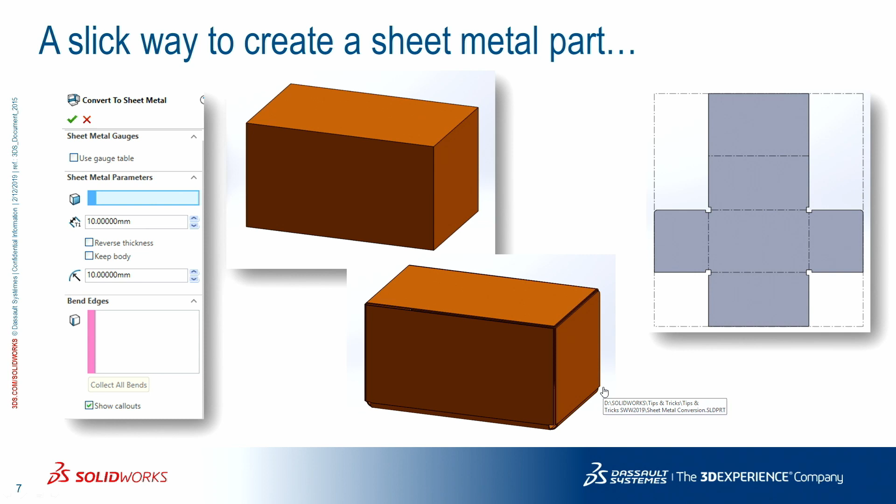Okay. All right, so I'm going to show you a slick way to create a sheet metal part. Now, most of our tips and tricks, I'm sure a lot of you probably know some of them. Some of you may not. And we hope you get at least one or two out of them. When you walk out of here with that, we'll be happy. Pull that up. There we go. So I'm going to roll this back. They're all pre-canned demos, but we're going to live in SOLIDWORKS. So I'm starting with an extruded block.

Pretty simple. Up in the sheet metal tool, you have convert to sheet metal, which is right there because I already have it in a sheet metal mode. So convert to sheet metal brings you to this. So you're going to grab a bend parameter, which is usually just the face on the bottom or the side. That all depends on you. Doesn't matter where you start it from. Right there. So I'm grabbing that bottom face.

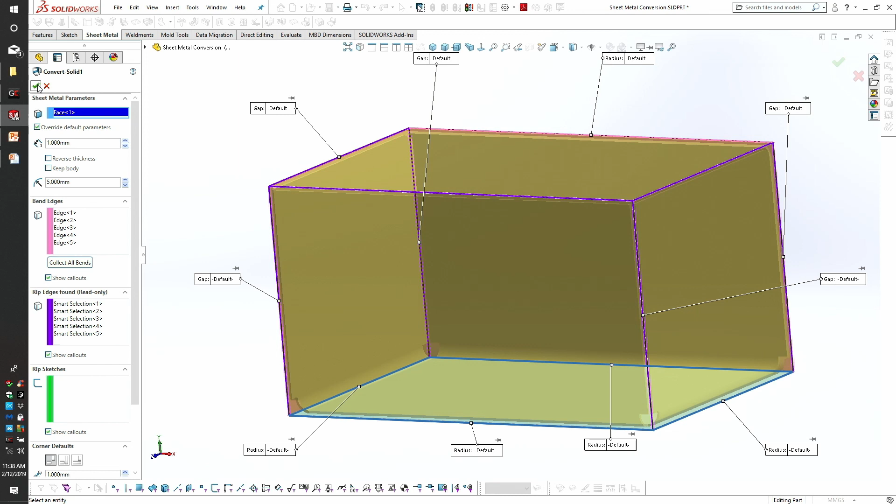The bend edges, all you do is click Collect All Bends, and it'll find all your bend edges for you because I've already had the process, already have the bend edges in there. But it's basically the other four corners of the opposite side of the face. So I pick that corner there, that edge there, and that edge back there. The rip edges, it'll automatically populate that. Pretty straightforward. Hit the green check mark, and you have a convert solid. Now you can do a flat pattern with that as well.

Flatten. And there's your flat pattern. Now it's all from a solid. One of the other things you could do too is if I do a split line on the top and I click that bottom edge, it'll actually create a window in that sheet metal. So you can get really creative with convert to sheet metal if you really want to get there.

But for those of you that may not want to dive deep into the sheet metal tool, start off with an extruded block. Pick a face, convert edges, click a couple edges, and you're done. It's really simple. Don't try to make your work harder, work smarter. Pretty simple stuff. You? Thank you, Ed.

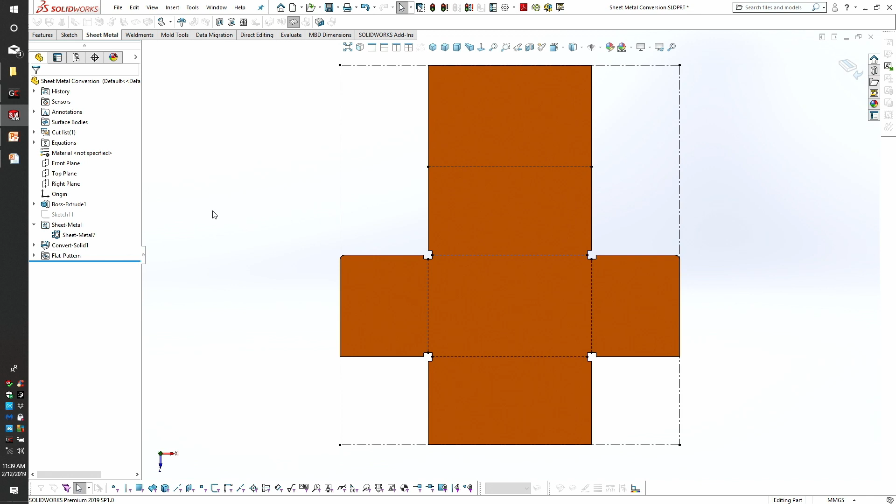Yeah. My first one here is really not a tip or trick. This is one of the new enhancements for 2019. And from teaching for 25 years and teaching the SOLIDWORKS software for more than 20 years, one thing I see that's very common, whether it be a student or a person that has many years of experience out in industry, once you learn how to use the software, when you're creating parts, assemblies, and drawing files, typically for many years you don't vary from that path.

You create your parts the same way over and over and over. And the same with assemblies and drawings. And in fact, I tell my students, they always want extra credit work. I tell them the best thing you can do is get up and help other students. Just see how other people approach models. That is one of the great ways to better learn the software.

Well, we have new releases every year. New features, new enhancements come out, and I think a lot of times we see them, but we never use them, we overlook them, especially the smaller ones. And here's one of the smaller enhancements, but it's very useful. How many times do you have a fully defined sketch, then you get in there and start trimming, and now it's underdefined? Very common problem in a classroom setting, and I even see that's kind of an issue out in industry too.

Because my entire program is mechanical design, and we do mechanical parts, I require all of my student models to be fully defined. So one thing I do is I expand the tree, and I make sure every sketch is fully defined. So I'm going to go ahead and click on this. And before 2019, let me go ahead and edit the sketch. I'm going to go to my trim tools. I'm going to use the power trim. And you can see before I start to do the power trim, it's fully defined in the bottom right-hand corner.

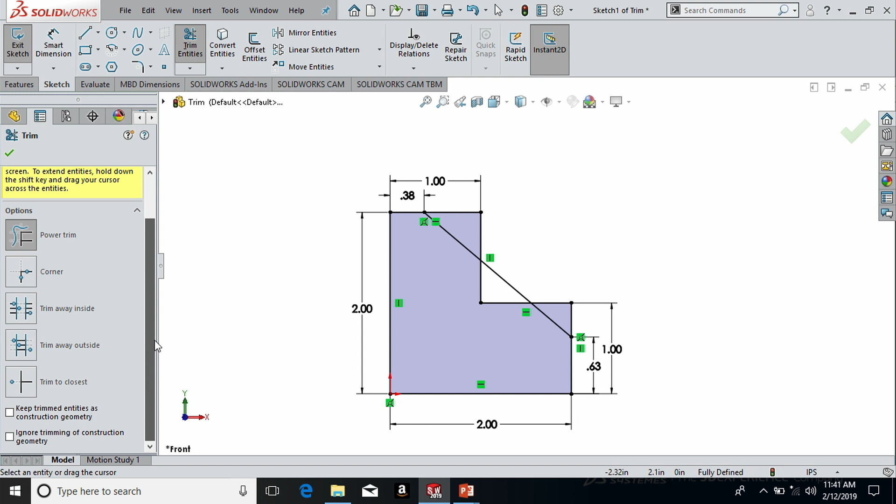However, once I use that power trim and I begin to trim, does it take too long before it's underdefined? And a lot of times we're just so busy, we overlook that. So in 2019, let me undo that. Under the trim entities, we have two new options. How many people have seen these two options? See, just a few people. So this is really cool.

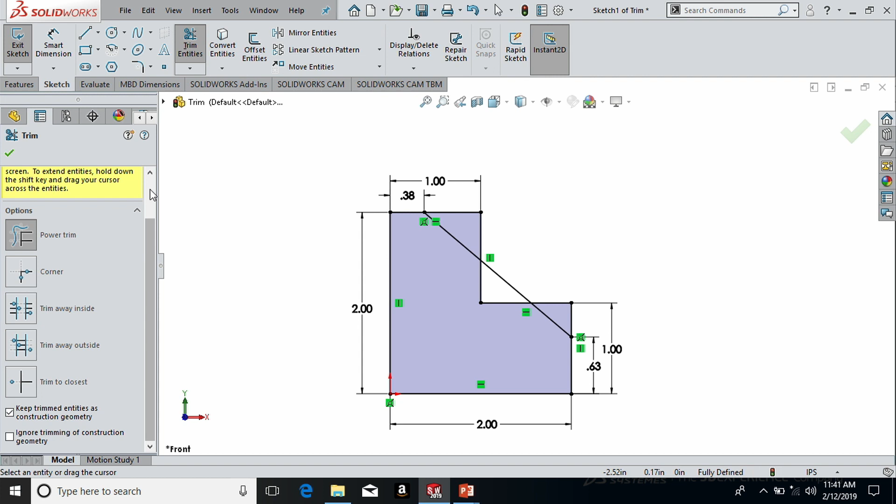These are both check boxes, square check boxes, not round radio buttons where you have to make a choice. So you can have one checked, both unchecked. But the first one is keep trimmed entities as construction geometry. So I'm going to put a check mark here. Excuse me. I'm going to go to power trim and check this out: when I take my spline, it switches it over to construction geometry, and it keeps my sketch fully defined.

Really slick. It is a huge improvement for us in education, because students are learning this software, they get their sketches fully defined, they trim, they turn their assignment in and get marked down because it's not fully defined, and they're frustrated. They don't know why. They say it was fully defined, what happened?

The second option is ignore trimming of construction geometry. So in this one, as you're taking your spline through construction geometry, it will not trim it away. It will keep it. So two smaller enhancements, but really cool. I think it's going to make a difference on the sketches we do out there. So if you haven't seen that yet, it's part of 2019, just one of those smaller enhancements, but I think it's pretty neat.

And at any time, throw your hand up, throw out a question. This is interactive. Yes? I believe so. Yes. I would have to check on that. I believe so, yes.

So in this example, I used this yellow configurated part, and I'm going to show you the bounding box. And there's some value to the bounding box. You can use this for any part feature, doesn't matter what size or shape it is. The bounding box will give you parameters X, Y, and Z. That actually might be helpful downstream in a manufacturing environment. Maybe on a drawing you want to display the bounding elements for size purposes for a manufacturer.

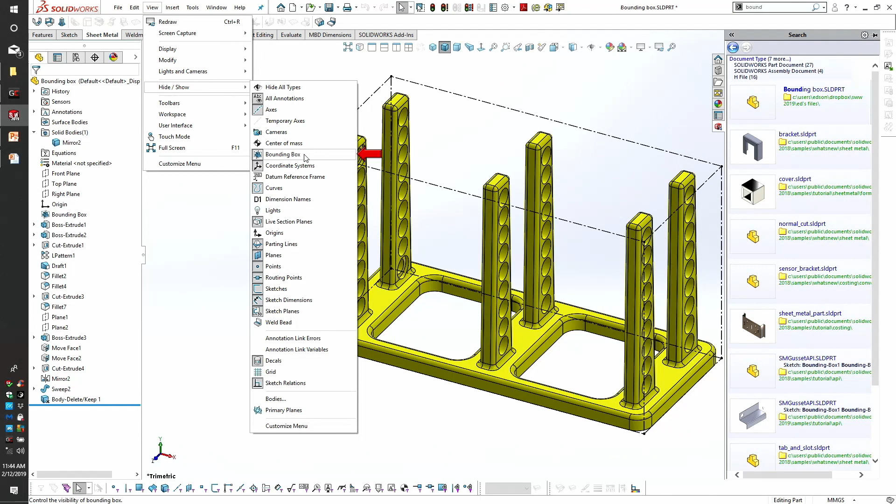This is interactive. Roll up your sleeves. Dean rolled up his, but he's got tattoos down to his wrists. I've only got it down to my elbows. So not yet. Getting there. And there you go.

So here it is up here. Bounding box. I'm going to edit this feature. Best fit, custom plane, so you can decide where that bounding box should start. I'm going to go best fit. That seems to work the best for me. It'll actually give you that geometry automatically. Now, here's the beautiful part. Go up to the Properties tool, Configuration Specific. There's all the values of that property, of the bounding box.

I can use that on a drawing. I can call out those properties in a drawing or in an assembly. And that actually might be good for somebody starting, if it's a piece of sheet metal, or maybe a piece of plastic, whatever the case may be. Pretty simple, straightforward. You guys like that one?

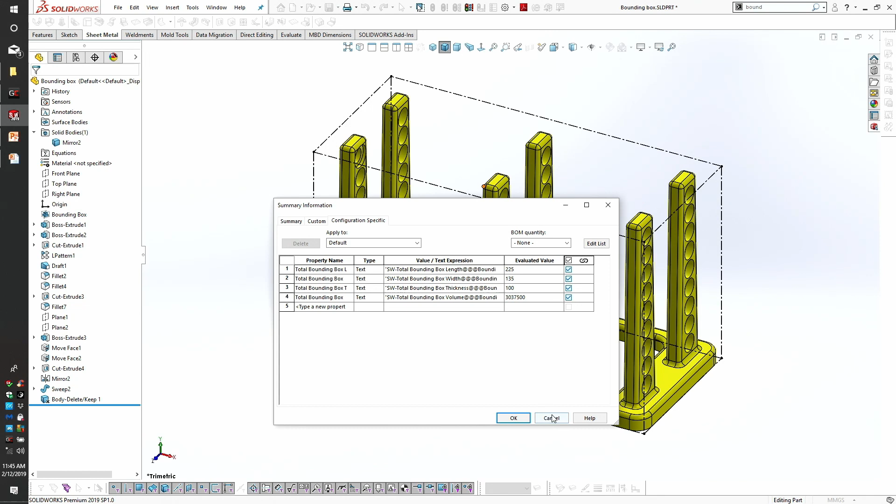Give us some feedback. We're up here listening. Hit the now or close this. Yep. Bounding. Oh, that's fine. See, this is what I love about these tips and tricks. I just learned a tip and trick. That's a pretty cool one. That is cool. I didn't know you could do that with the S key. Thank you, Steve. All right.

So if you have a uniquely shaped part, will it best adjust the bounding box to get the minimum? Yeah, mass size. It'll go right to the edges, X, Y, and Z. Yeah, so that's perfect. That's exactly what that's for. I learned this tool from a friend of mine who does a lot of aerospace parts. The manufacturer wants to know what that size envelope is going to end up being. So this way here, they know how much material they're going to use.

Say that again, Mike? Exactly, yep, from a certain plane or a certain surface. Say that again? Yeah, anything that's geometry in the SOLIDWORKS desktop, it'll give you a bounding box. 2016, I think, is when it came out. Anybody know? Any VARs in here that would know that? I see John Hall there in the back. John, do you know? Take a guess. Okay, 16 is correct.

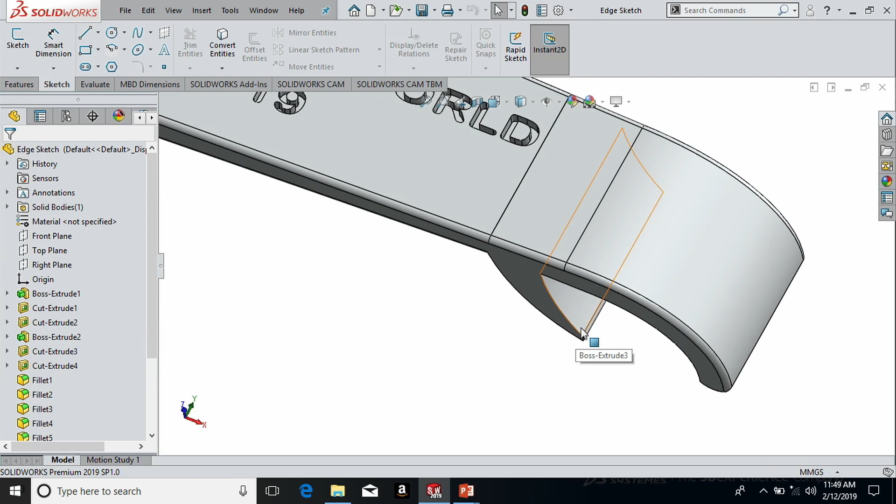Normally when you want to place a new sketch plane, let's say at the very end of this piece of geometry, at the very end of this entity, and you want it to go through this endpoint here, we would go to Features, Reference Geometry, and we would select Plane, and then go through the necessary steps to add that. There's a cool little shortcut.

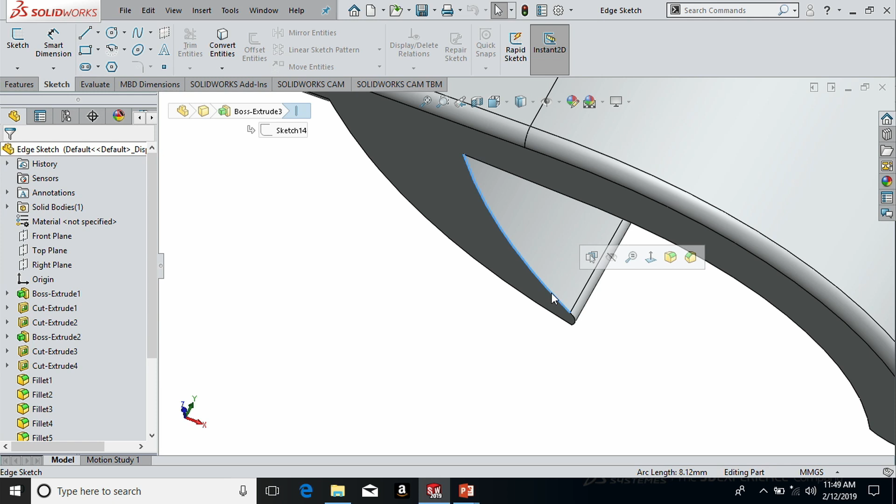All you need to do is click on this entity near the point where we want the plane to be normal to that entity. So I'm going to click right here, just one left mouse click. I'm going to go up and click on Sketch, and it creates a plane normal to that line right at that point. So again, really slick.

You don't have to go through all of the necessary mouse clicks to insert a new sketch plane normal to an existing line. I'll do it one more time. I click on this line here. I click on Sketch, and it creates a new sketch plane at that point, normal to that line segment. Yes. Plane 1 and plane 2.

Any questions? Preloading that reference geometry. Yes, just saves you a couple mouse clicks. So really handy. And this works on any edge type from linear to prismatic to organic shapes and even lofted shapes. So really cool. Saves a lot of time. Yes, just a single click and then you click on the sketch icon and it creates a plane.

Half the time you do that and you create a plane, you don't know how that plane got there. You just did what Dean showed you. Yes, exactly. Seriously. How did that plane get there? Well, I didn't click nothing. Well, you did. You just don't know you did it.

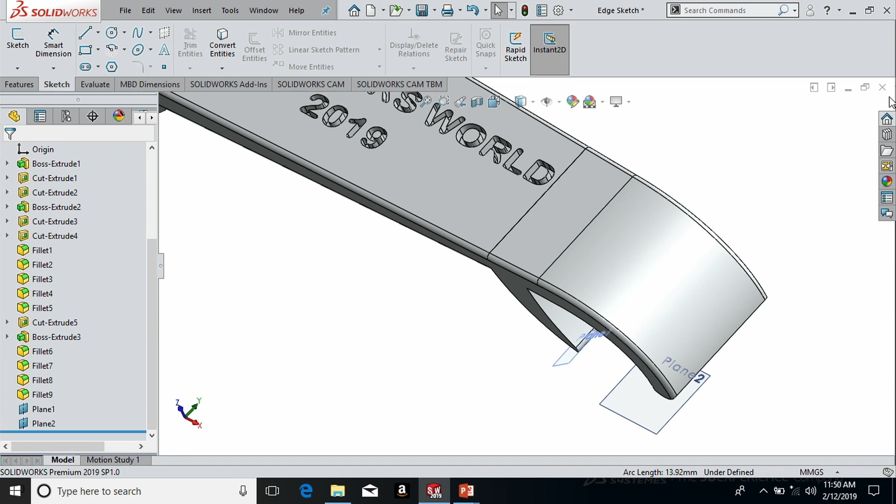Yes, so exactly. The first one I selected near that end point. So if I selected more at this end, then it would place the plane over here at this end point. So it does make a difference where you select along that segment. This one's pretty straightforward and easy. Sweep and merge faces. Let me open up the file.

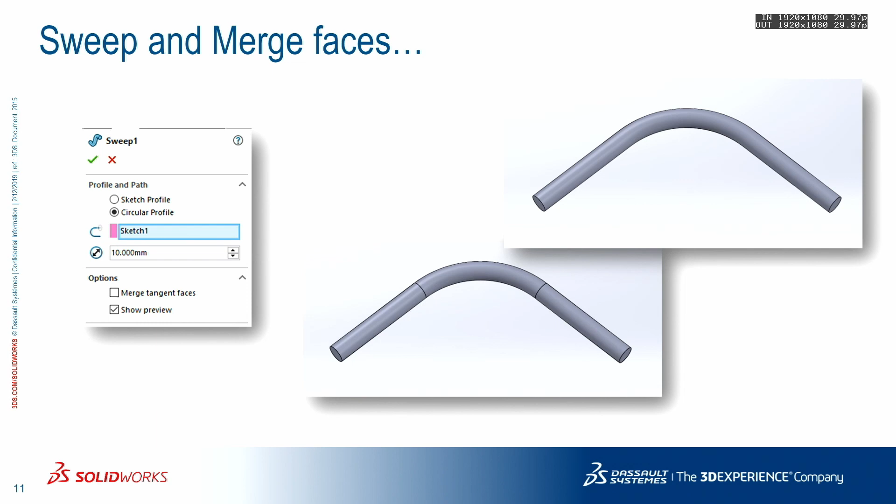So we've all created a sweep, correct? But you get those segmented lines off from all the curves or whatever the case may be. You ever want to just turn it into a smooth part like it was a spline? Pretty simple. Create your normal sweep. You have this nice little feature right here called Merge Tangent Faces. Click on Merge Tangent Faces. There you go. That one's about as easy as it gets.

It's slick. There's a slight caveat with it. If you're going to use the part file in a drawing, you've now removed those edges, any of those sketch edges you need. So if you need to dimension to that, you can't. You're going to have to do a little setup in the sketch to get those points to show up in the drawing side. That's all. Any questions? Yes.

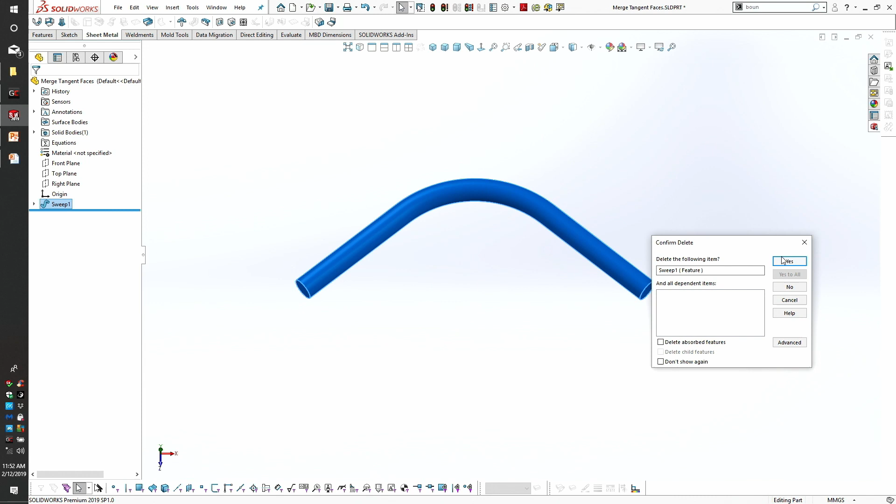No, because the surface would be continual, wouldn't it? Not necessarily. You want to try it real quick? Let's see what we get. Let me delete this. I got that. Surface. Circular profile. Let's change it to something small. Click that.

So options, merge tangent faces. Let's see. Ready? There you go. Cool. Yeah, it's the same underlying code. True. Very true. So surfaces and solids. Yeah, to the arc, you won't be able to because there's no edge reference there anymore. So you have to create some geometry to pull that into the drawing.

But sometimes when you're looking at models, I like that nice clean flow. I don't like all those edges. Just me, but it's a nice little tip people don't know. Yes, sir. I have no idea. I think it's been there forever. So at least 16, right?

It's like anything else. You're in SOLIDWORKS, right? Click a button. What's the worst that can happen? You just dump the file and reopen it, right? So click around, pick buttons, see what happens. That's how I came across this. Oh, what's this? Click. Oh, that's sweet. Nice. Any other questions?

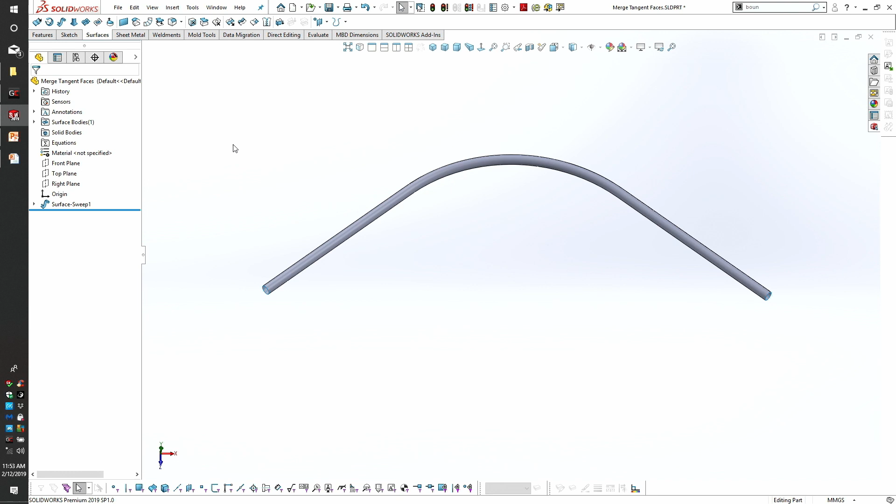I've been using SOLIDWORKS for more than 20 years now. And every once in a while I'll be looking at a command I've used hundreds of times over and I see a new option. When did they put that in there? It's been in there for 3, 4, 5 years. You get so used to just doing the modeling the same way.

Hold on, Dean. Okay. So real quick, does everyone know that I didn't use a sketch, a circle, a square to produce that profile? It's built into the sweep tool now. Who didn't know that? Few people. So if you don't have a diameter, I think you can only do it with a diameter. Yes. But if you don't want to create that geometry, you don't have to. You just type it in right there. That's really slick. I like that a lot.

Not one that you can pick on. No, it's probably Booleans buried in there. You can double click on the model and it'll come up with a dimension, but there's no sketch. It's canned. It's one of those canned parts of the program.

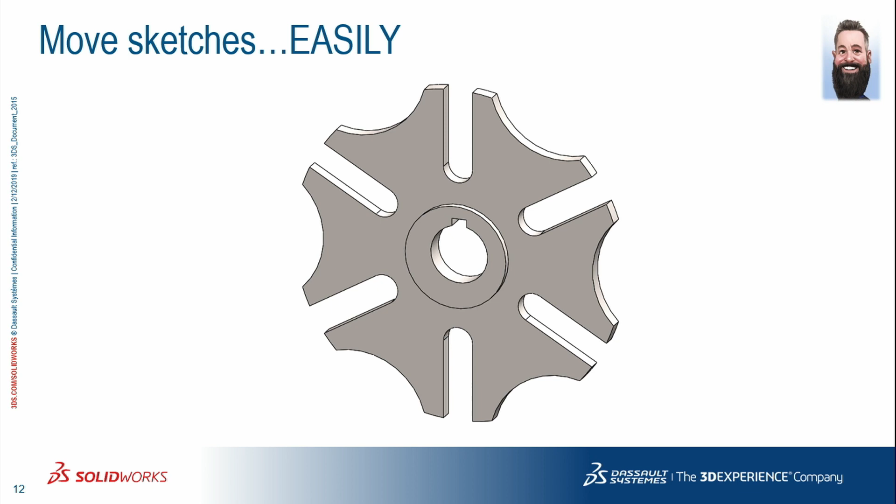So on this next one, I'm going to show you a real easy way to move a sketch. You can see I purposely took the sketch for that bore and that keyway and moved it off center, which is incorrect. A lot of times when we import, we do a copy paste from DraftSight or other 2D applications. That data comes in underdefined and doesn't come in the correct location, so we go to move it to the correct location, and it doesn't work as you would expect it to. So let me go ahead and open up the file and show you what I'm talking about.

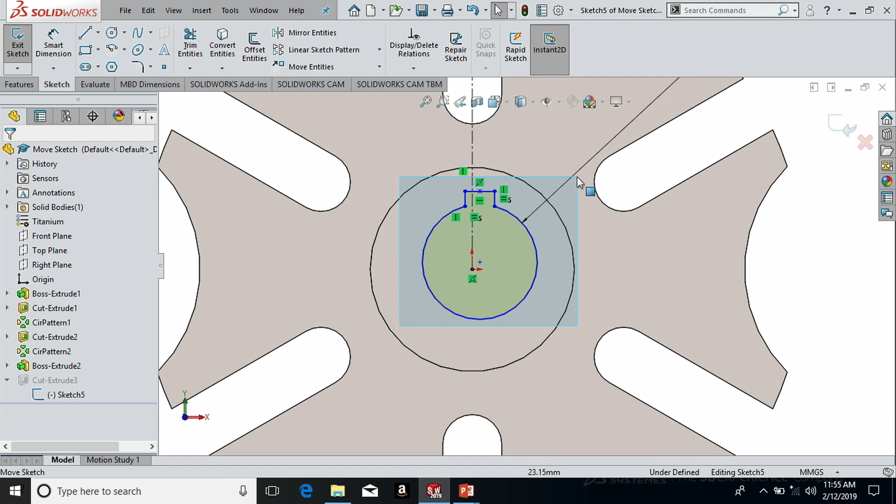So let's see here. First of all, I need to identify the sketch that falls under Cut Extrude 3. So I'm going to edit the sketch here. And most people believe to move this sketch, you would simply put a window box around it, correct? You'd hold the left mouse button down on the center point and drag it over to the origin. But look what happens. A lot of people believe it should move it, and it does not. So we do have a Move Entities tool up here, but if you get into discussion forums, there's a lot of frustration with this because a lot of times it does not move it to your intended point. So I'm going to show you a way to move that sketch real easy.

I'm going to go ahead and window select it one more time. This time, I'm going to hold down the Control key on the keyboard. I'm going to hold down the left mouse button on the center point, and I'm going to move it off to the right for a second. I don't know if you can see my screen up here, but notice there's a plus sign next to the cursor, correct? That means it's going to copy it, not move it. And if I go over to the origin and I release the left mouse button, it makes a copy of it. That is not what I wanted. So I'm going to go ahead and click undo. As you can see, the geometry is still selected, so no need to reselect it.

Here's the trick. I'm going to hold down the Control key, hold down the left mouse button on the center point. The trick is you want to release the Control key first. When you release the Control key first, it moves it instead of copies it. Really nice. I want to hear an ah.

We rehearsed this before the weekend because he lives in Michigan. I live in Mass, so I tried to get myself to Michigan, it just didn't work out. He showed me that and I went, damn, that's slick.

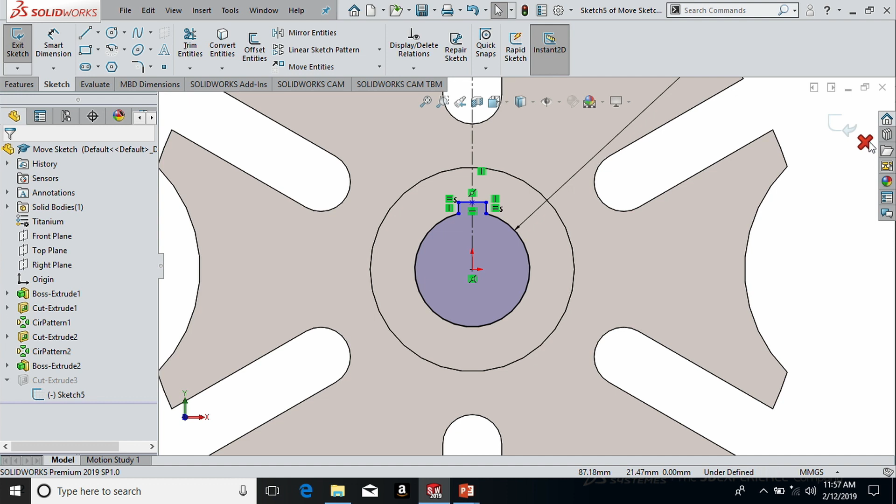So Control key, you have to release that Control key first. Then it'd be a move command. Any questions? I think it's just a caveat, I just kind of stumbled across it at one point. Windows functionality. Yeah, like most things, John.

Yeah. What's that, Dan? Yeah. And you wonder what happened. After one of these, right, Dan?

We could have. Yeah, that was another option. Well, you could have dimensioned it too, right? Yes. And then you can drag it. Don't point it to anywhere, but then drag it over the origin. Could do that as well.

Yeah, and quite honestly, in my classroom setting, my best practices for my students are always: number one, you always allow those automatic relations to be added automatically. Number two, if need be, add or remove existing relations. And number three, always smart dimension last. You want to define it with the relations first before you smart dimension.

Yes. So if you're in DraftSight, you've got a sketch over here, you want to bring it to the origin, you want to go pull it, you want to bring it across. So that's... Yes. Yes, exactly. Anyone else?

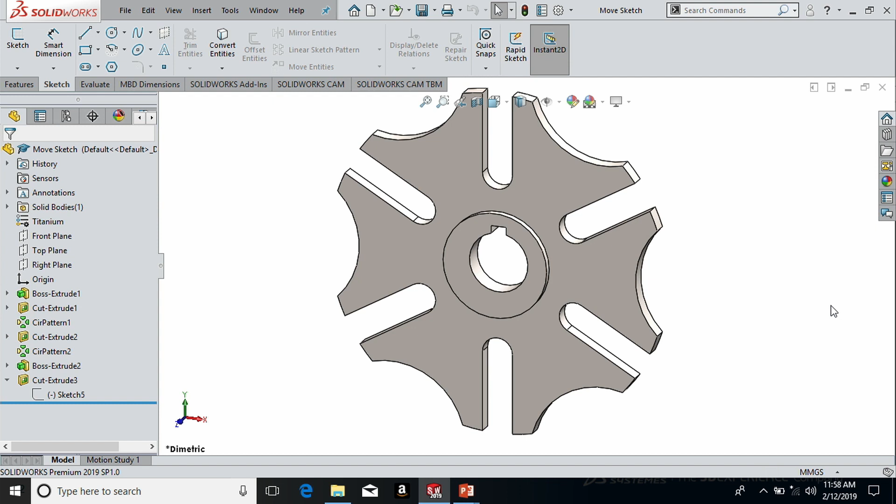Here we go. I'm going to show you how to do this spiral on a dome. Create an extrude, of course. Who's used the intersection curve command? A few people. Wow. All right, maybe I don't need to show anybody. All right, let me open up the part file.

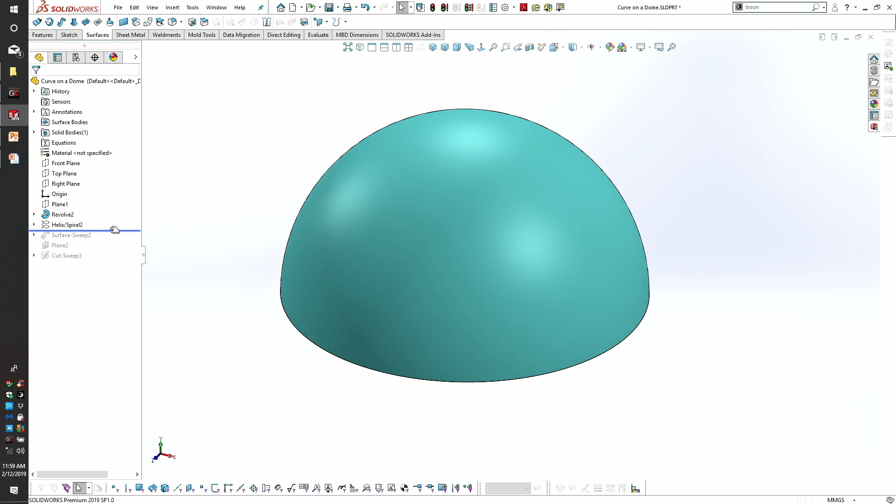So a challenge, colleagues, how do I create this? So both of us were going back and forth trying to figure it out. And between both of us, we went, intersection curve. So I'll go through the motions of what I created. Pretty simple, create a revolve, right? Create a helix. Let me turn these on so you can see. So I just create a sketch in the center. That helix is actually going to allow me to do a sweep, a surface sweep, all the way up.

Here's my surface, turn that on. So there's my surface. There's my geometry. So I have a surface, I have the dome, the surface of the solid, the dome. And I'm going to dive into the intersection tool just to see what that looks like, because it shows a little differently when you do it as opposed to afterwards. Intersection. Oh, you know what? It's probably not going to allow me to do that.

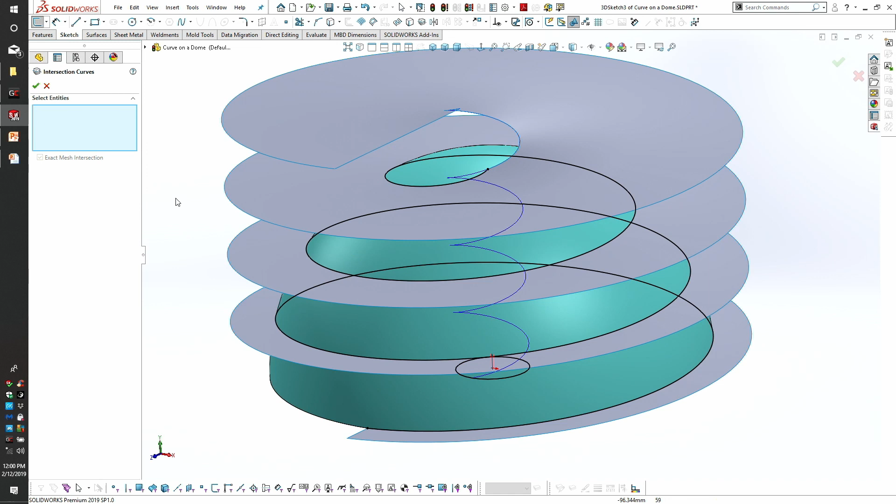Sketch. Intersection curve. So I'm going to click the surface. I'm going to click the dome. Green check. I'm going to hide this. I got to get out of this. Hide that. And I'll just hide this for sakes. Shut these off. So there's my geometry. That's what I want. Now, if I just needed that geometry to create a spiral, something extruded, I could do that. Obviously, I'm doing extruded cut.

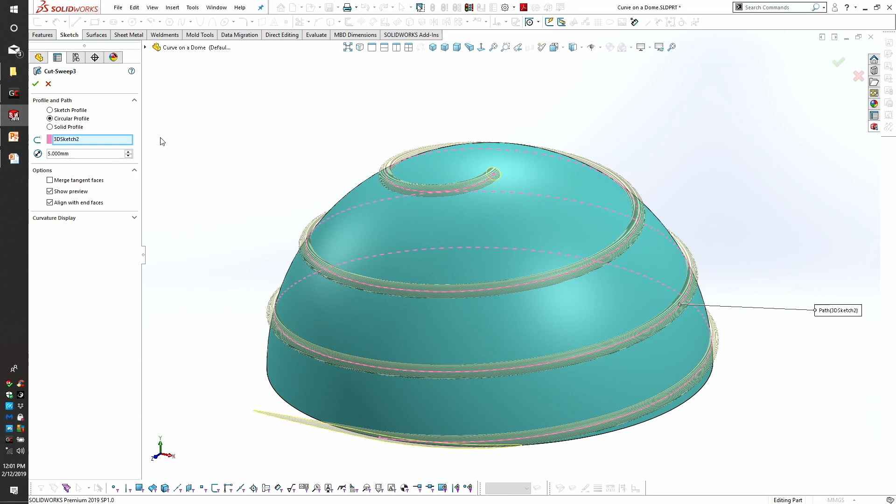And once again, a cut sweep. If I edit that, I've got solid profile, circular profile, sketch profile. I just dial in 5 millimeters, click the path from the intersection curve, and I get that nice extruded cut sweep. Pretty slick. Now, some of these examples are obtuse. We understand that. Well, mine are probably more obtuse, but they're obtuse on purpose.

Most of the tips and tricks that I get are because someone showed me something that I went, you know what, I could use that here, or I could have used that here. So I'm basically just showing you stuff that hopefully will plug in your brain. You go, I remember seeing a tips and trick. They use the intersection curve. You know what, I'm going to try that. That's where a lot of my tips and tricks come from. Yes, sir.

You can, but it doesn't create the nice sweep of a path. It actually makes it kind of a weirder path. When my colleague and I were doing it, I was actually trying to do the wrap feature, and it just didn't create, and there's a limitation on that wrap. You can't have a sketch overextending the geometry. It won't actually do the wrap. So, yeah, there's some limitations there. Yep.

Hijack it, Dan. Please, hijack. If you wanted to boost your rebuild time and reduce the number of features, you could, instead of building a helix, just have a straight sketch, and your surface would be a straight line. Yep. And you just do the twist along path. Twist along path, yep, twist along path works too. There's still some computation with that as well, but yeah, the helix will definitely take a lot more computational power. Anyone else?

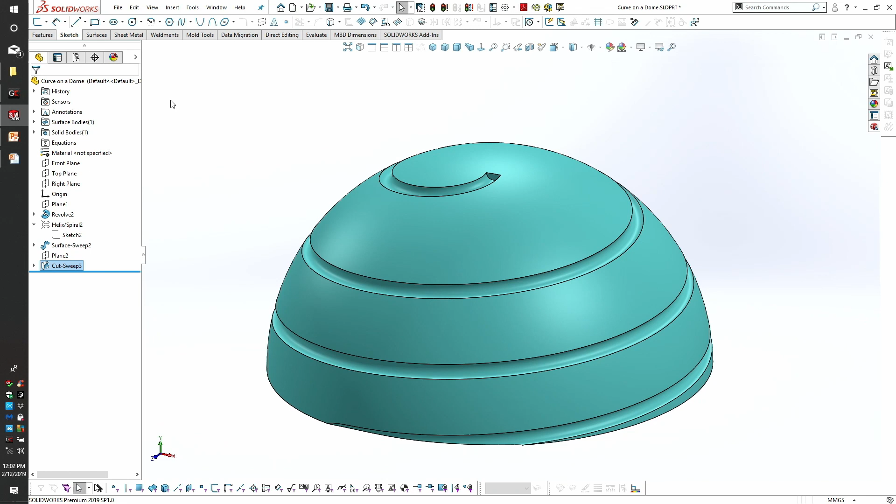So this next one here is really not a tip or a trick. Maybe the second part of it is, but not the first part. It's just, once again, people, once they learn how to use the software, they typically stick with that method because it's tried and tested, and they don't vary much from that.

And we have so many, just really quick side note here. Teaching at a community college, you realize that a lot of the students coming in your class, my classes range from 16 years old up to 76 years old. But you have so many younger students in your class, they don't have mentors. And a lot of our schools don't have CAD, machine tools, auto service.

So if you really want to expand your CAD skills, go out and find your nephew or niece or a neighbor that wants to learn the software and teach them the software. And then once you show them a little bit, send them off, have them come back, and you'll be amazed at how people take different approaches at modeling. And that will definitely help you expand your modeling skills too. Just seeing how different people look at models.

Well, this one here, how many people use dynamic mirror? Okay, about maybe a third of you, a quarter of you. We have so many parts that are symmetrical, and we're not using dynamic mirror. So for example, if we want to make this structural steel item here, what we would typically do is start the center line. I already have the center line existing. I'm going to edit the sketch.

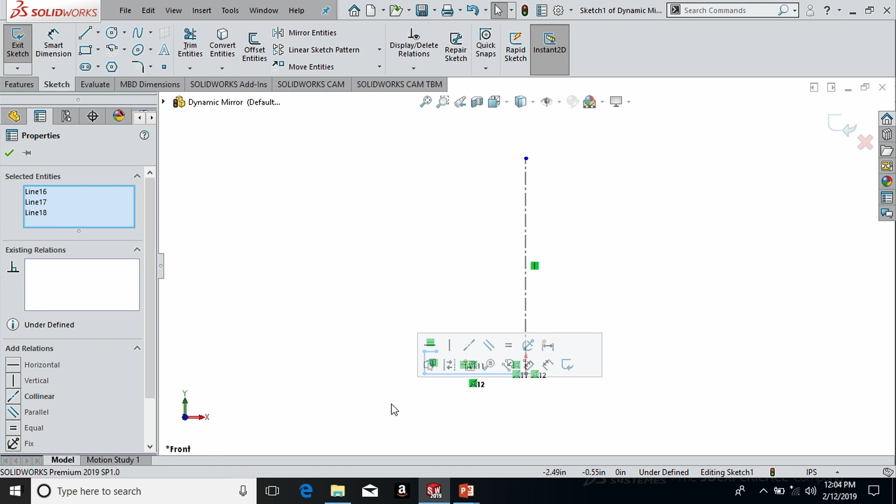And we would simply go out there and draw the geometry on one side of that center line. And after we had that geometry drawn, then we'd use the mirror entities to mirror it to the opposite side. That's how most people mirror geometry. But we have something called dynamic mirror, and this is really cool. If I go to Tools, Sketch Tools, Dynamic Mirror, it prompts me for a center line.

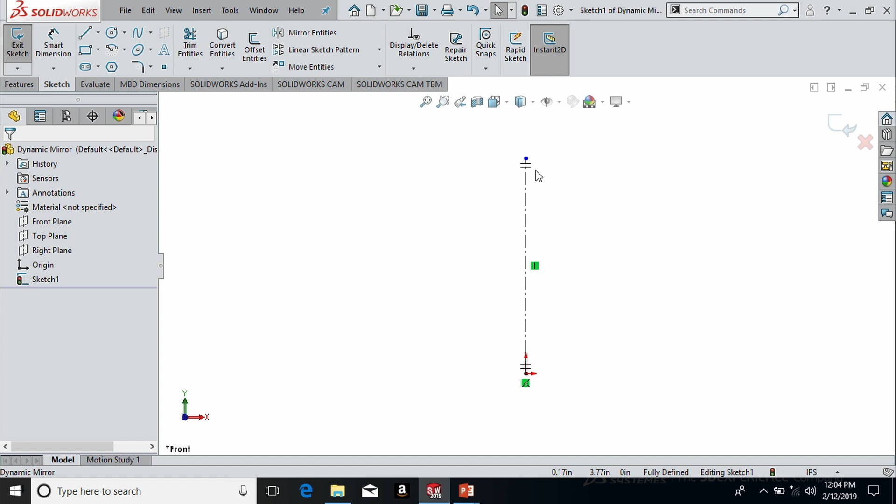So I'm going to select this center line, and as soon as I do that, I'm going to see a symmetry symbol on both ends of that center line. And here's the dynamic part of it: it will build it on the opposite side as you're building the sketch on the left side of that center line. Really, really handy. Now, one thing you need to be aware of, if you close out of the sketch and you want to go back into the sketch and make changes to it, it does not place you back in that dynamic mirror command. You have to go back through Tools, Sketch Tools, and Dynamic Mirror and start it back up.

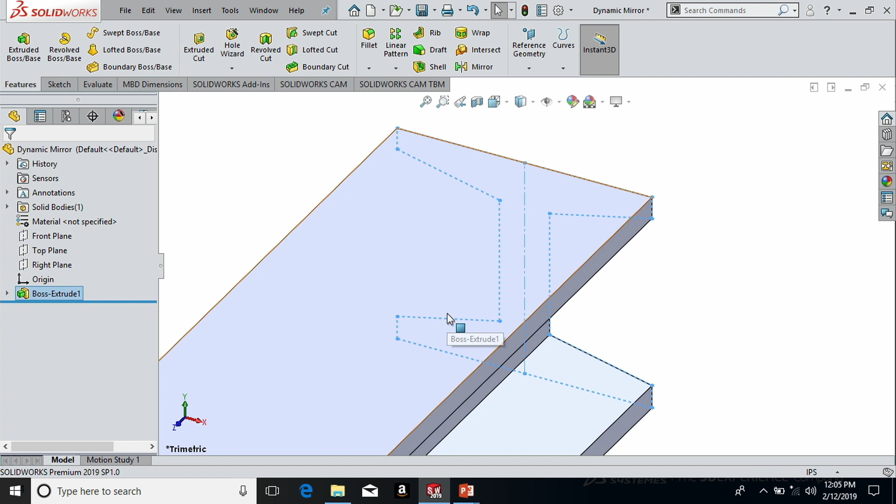And the next tip here, this would be probably for the newer users. Let me go ahead and just extrude this really quick. When we are out there measuring entities or finding the angle between two lines or two faces, most people head straight to the Evaluate tab and click on Measure. You may not know this, but down in the bottom right-hand corner, if I click on a vertex, it'll give me the XYZ coordinates of that vertex point. Or if I click on a line segment, it'll give me the length of it.

Or if I hold down the Control key and select two lines, it gives you the angle. And the same is true for faces too. Anything more complex than that, as far as measurements, you would have to go through the measure tool. But for your simple measurements, this is really nice. It just eliminates a couple mouse clicks. You can go right there and select it, and it shows up down in the bottom right-hand corner.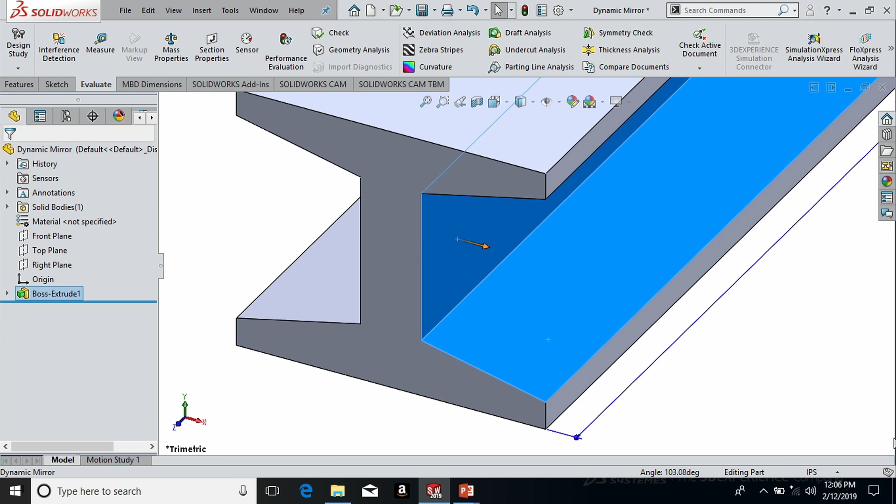Yes? Do you have to exit the sketch to get out of dynamic mirror mode? Escape key, right. Yeah, Escape key. Any other questions? Back there. Does it work on? What? Yes, it does, because you're only defining one section of it because it's doing that dynamic mirror on the other side. And you'll see it's adding the relations as it's building it. And for time's sake, I didn't do the last part of this and add the smart dimensions.

I don't believe so. It's one time. You're talking two at the same time on the same sketch? Yes. Oh. No, I think it's strictly for that type of geometry right there. Anybody else? The other thing you could do too, obviously, you could mirror that as well. But now you have to go to another window to do that. But that's SOLIDWORKS, right? You could do the same thing three different ways, right? So add that to your repertoire as one of those ways.

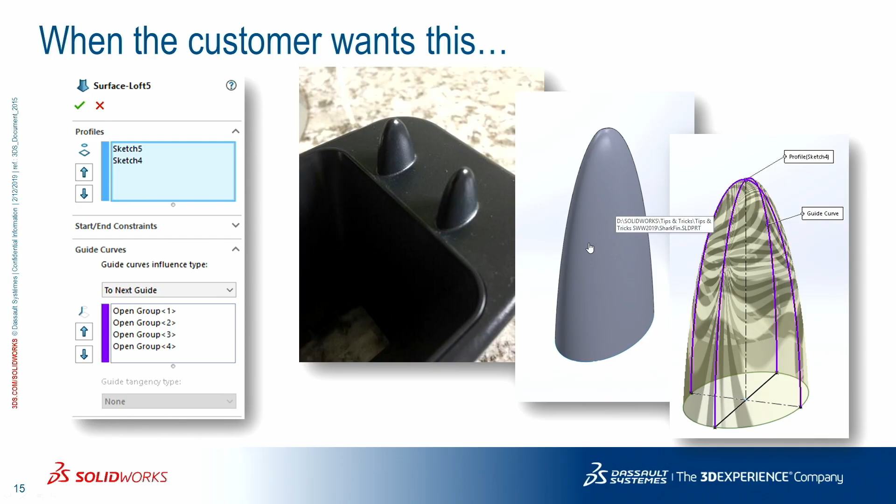So on this slide, I'm going to show you how to produce that geometry. So that's what the client wanted, and I have to reproduce that. I actually had to do a little search to figure out how to do that, but I'm going to show you how I did it. I'm actually going to delete this.

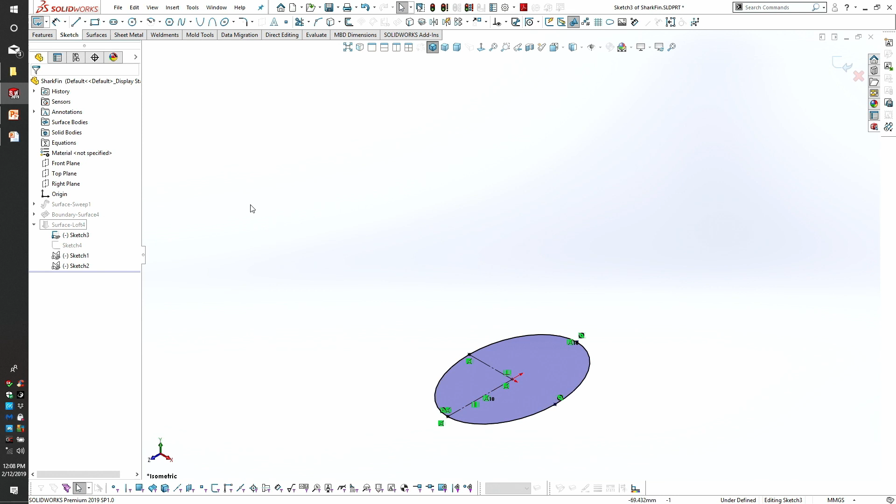I want to do that. Delete. I'm just doing a little cleanup to make this easier to represent. All right, here we go. Okay, so there's all the sketches that I created to make this. Delete this. So there's this sketch.

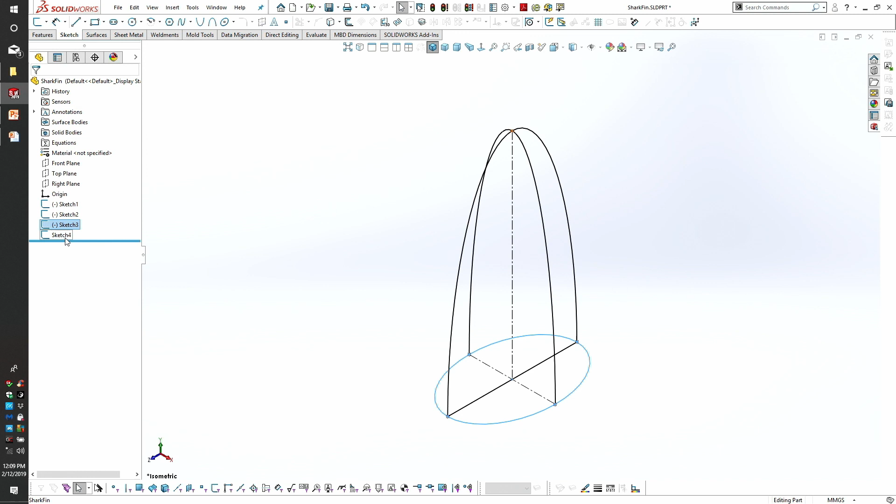That's actually 2 segmented ellipses or arcs, whatever you want to call them. Those are 2 different sketches, starting at the top, working their way down. Single sketch, 2 entities. That's a single sketch at the bottom, and that's a point. And it's right there. It's kind of hard to see.

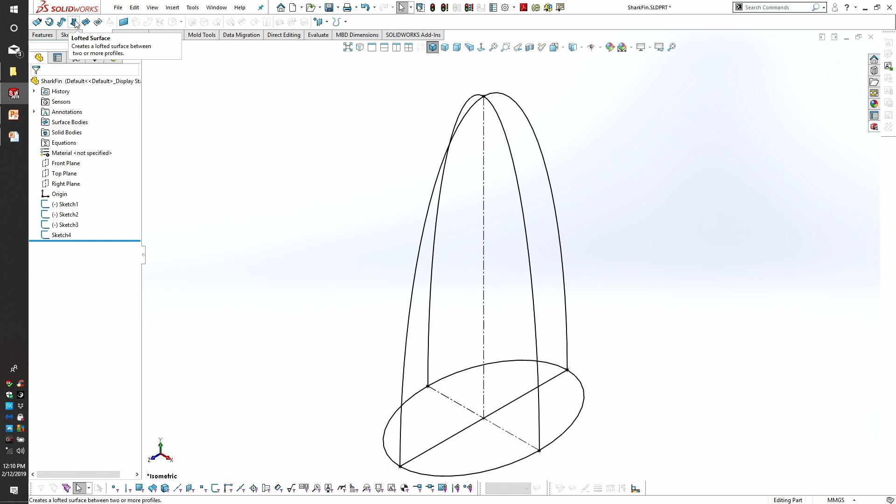So I'm going to go to my surface tool, because in solid, doing this in a solid loft, it performs a little differently. So if you're ever having a problem doing a solid loft, try a surface loft. First thing I'm going to do is I'm going to click the sketch 4, which is that point, and the bottom sketch, which is a complete ellipse at the bottom.

I'm going to click on the lofted surface tool. So I get this. So a point at the top, sketch at the bottom. It does that nice loft, okay? There's a little bit of a catch with this. That sketch 4, which is the point at the top, has to be below the sketch 3 in the profile order. If it's at the top,

it doesn't work. But in 2019, it works. In 2018, it doesn't work. This is why I didn't want to switch to 19. So in 2018, if you do this, the point has to be underneath. In 2019, I guess it doesn't matter. We'll continue. But I need those guide curves.

So the guide curves, the reason why they're segmented is I have to click one at a time. I have to go right around. If it's a single sketch arc, it doesn't work. It doesn't know to produce that loft. So I'm going to click on my selection manager tool. I'm going to pin it so it stays up.

Select group. I'm going to click that. Right mouse click, green check. You can kind of see it right there in the corner. There's that one. Right click. There's that one. There's that one. Let me just rotate around here. And there's that one. I don't do anything else.

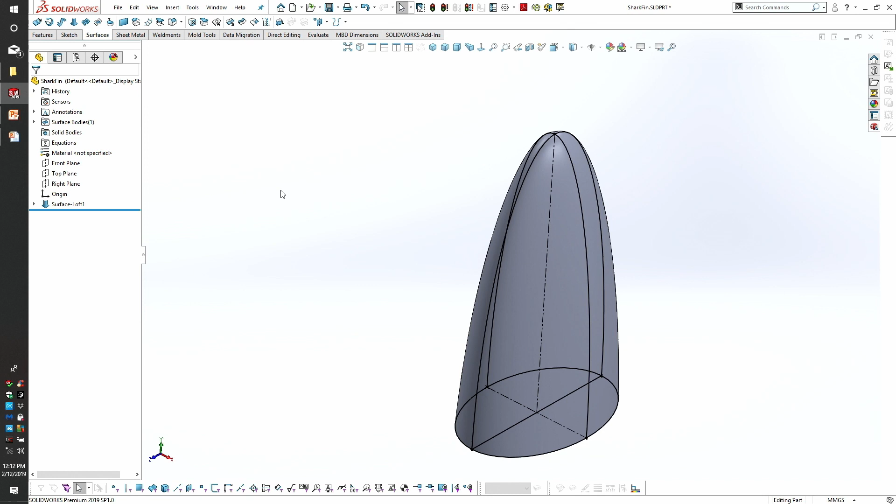Right there. Got it? Any other questions? Yes, sir. What I like to do too is just go straight from the ellipse. Yep. And then the point is set to normal to profile. Normal, yes. And you just get that shape, that bullnose. Yep, that bullnose shape. And unless you want to really control it. Yeah, I'm a little bit more decisive with the guide curves, but yeah, you could do that with normal as well. Yeah, that's a nice little tip.

Who does surface modeling here? Isn't surface modeling fun? No? Who said no? He raised his hand. No. That was funny. All right.

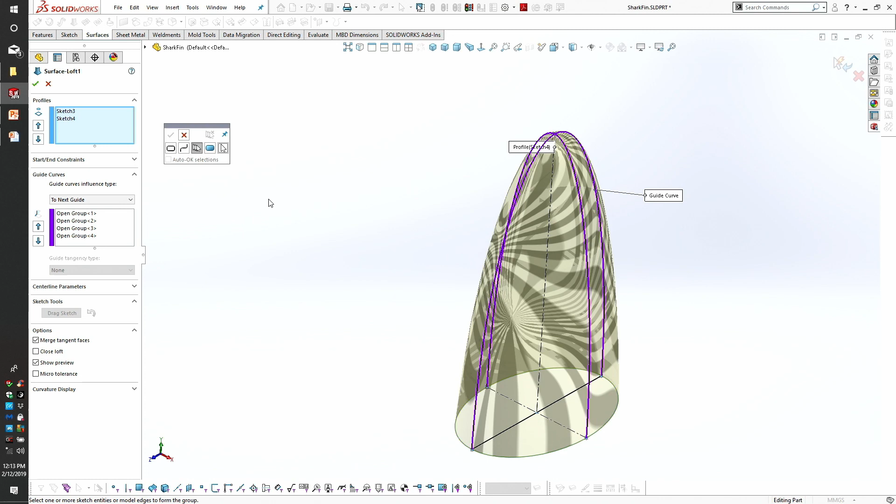I don't think a lot of people use decals. And when you do use decals, it's typically a custom decal. It's not one from the standard library. So the question is, okay, how do I create a custom decal? Well, first of all, the decals need to be saved in a P2D format. And again, most people, they need a decal, it's going to be custom.

And they've got to go out there in the forums, go through the help screen just to figure out how to create a custom decal and apply it. Well, most of the discussion forums and the SOLIDWORKS help screen will tell you to go to your add-ins and turn on PhotoView 360, which is your rendering. And it will step you right through the process to create a custom decal. Quite a few mouse clicks though. I'm going to show you a couple shortcuts to get the job done. So I'm going to go ahead and open up my beer bottle here.

And I'm going to select the appearance icon. Select on decals. I'm just going to pull over one of the stock decals onto the bottle. And as soon as I do that, my property manager opens for the decals. I can now click on Browse, and I can go find my JPEG image or my PNG image. So I'm going to go find GP's photo.

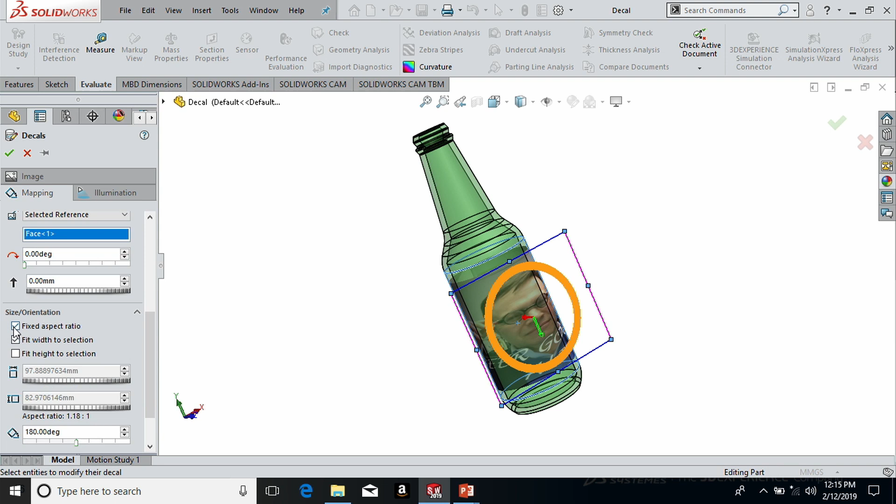There we go. And notice it replaces it. And I'm going to go down here quickly and just fix it up a little bit. Let me scroll down. Having trouble moving the mouse on this tablecloth up here. And there you go. We applied a decal to the bottle real easy. Instead of going through the PhotoView, it just makes it real easy. Then we can save it out to the location where decals are saved, or save it to a custom location.

Now, another one, I stumbled across this. I think this may be even easier, even though the method I just showed you is the one I've been using for years. I actually stumbled across an easier way to do this. You click on the appearance, and you click on decal, and it says, basically, go to your standard decal library. What a lot of people don't know, and I didn't know, I can simply right mouse click and click add decal, and then go grab that decal and place it on the bottle.

So it's unfortunate when you do that, there's nothing here that says that you can add decal. You have to know to right mouse click and select add decal. And I don't think we add decals a lot, but it just seems like we do. They're always custom, and everybody's scratching their head, now how do I do that? So there's just a couple quick ways of doing that instead of going through the add-ins and turning on PhotoView.

Yes? Okay. Mm-hmm. Yes. Can you save decals as favorites or no? Over in the right pane, can you do favorites over there at all? Right? You could do favorites with other stuff. Yeah, you should be able to.

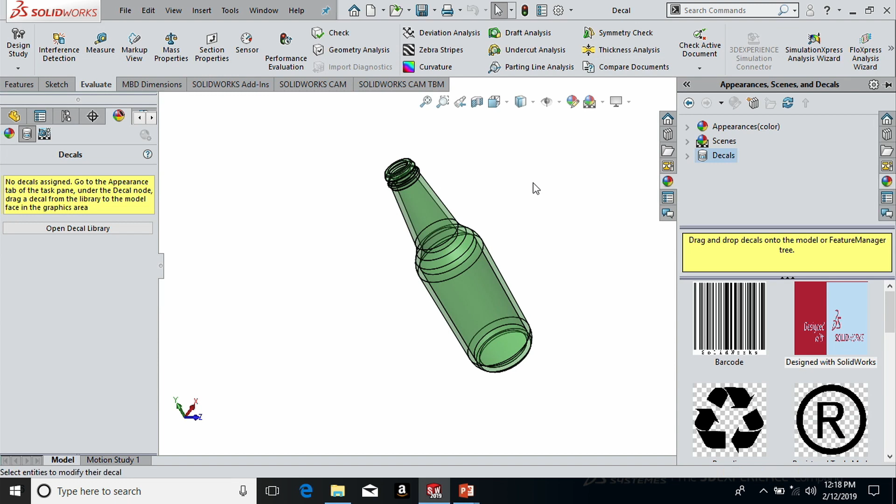Another question? Have a custom folder for your custom decals and just put it over there before you add it. Yes. Then it gets shared across. Yeah, it's network bound at that point, right? Everyone hear that? So store it with the PDM. It's network bound. Then it'll find it on the network through PDM. Good. Very good.

Oh, put a piece of paper underneath your mouse. Grab one. Okay. Making a difference. Yeah, that helps.

All right, so this one here, I do a lot of 3D printing. Again, just out of curiosity, who does 3D printing in here? All right, so I'm going to show you a nice little tip. Who actually prints threads in their 3D printing? Oh my God, you guys are missing out.

Use this tool. I mean, unless you're printing something like a 4-40 thread. I did a quarter-20 with some Onyx material, 150-pound weight, and it held it fine. Of course, it depends if you're printing it this way, right? Support material is this way. But I'm going to show you a quick little way to print those threads.

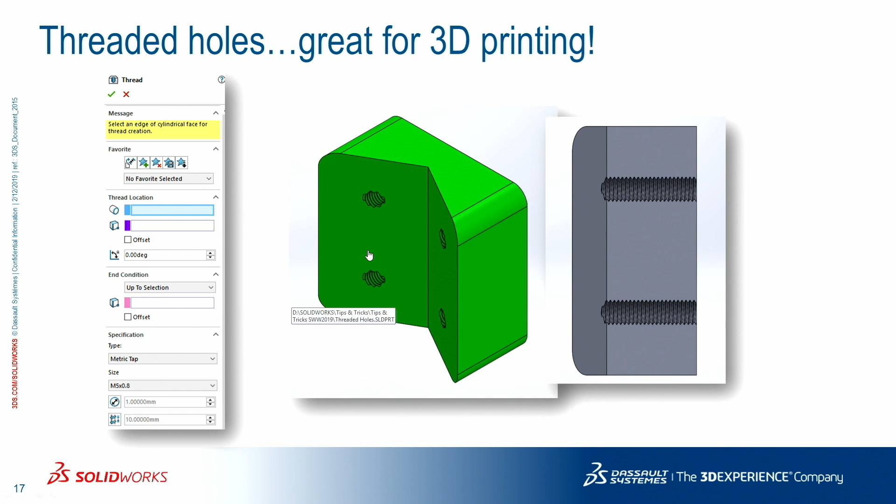So the feature is called Thread. It's under Hole Wizard. Of course, you can always find it with this tool right here. Brings you there. It's actually a drop down. I'm going to slide back to here. All right. So I have my hole. You need to know the minor diameter of your thread or other dimensions based on how you're going to produce the thread. I think this is an M5, so use a 4.2, right? M5 by 0.8, 4.2 is the minor diameter.

Go to my thread tool. It gives you this warning. The thread type, size profiles, and nominal thread profiles, do not use them for production quality threads. You only want to use this tool if you're going to do 3D printing or if you absolutely need to show threads in a model, because it does take some computational power. So keep it to just 3D printing, maybe make a configuration to strip out the threads when you don't really need it in a part file or in a model.

So the thread location doesn't have to be planar to each other, or it can be an angle. Doesn't matter. It's going to recognize that whole edge, even if it's at an angle. So I'm going to click that edge right there. I need to extend that, find a starting point on that hole. I'm just going to arbitrarily pick a vertex up there, because I know that's above the hole. I can create an offset, so I can offset below the hole or above the hole.

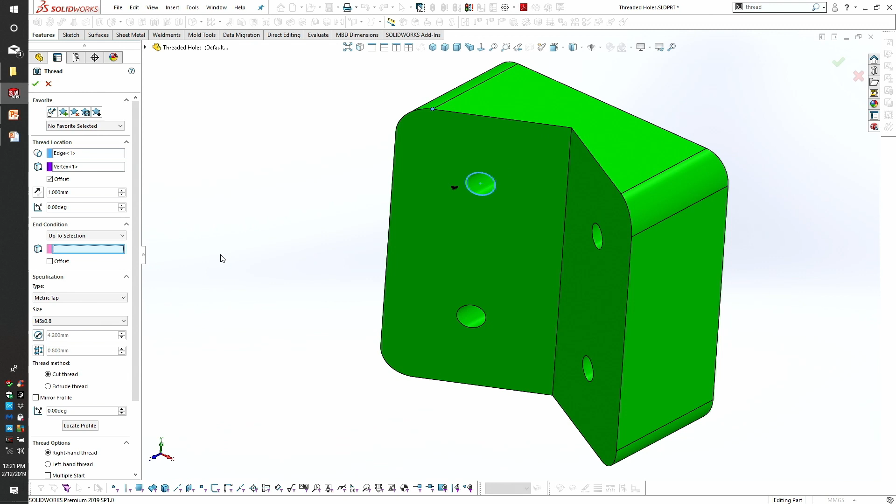So if you're 3D printing, you want to start above, because when you're printing, it's going to stop before the hole ends. You don't want that. So I'll just offset it by 1 millimeter. My up to selection, or I could do a blind end condition, doesn't matter. But I want it to go to here.

Now, here's where the fun comes. Specification, metric type, right there. Metric tap. I could do an inch tap, I could do a die as well, or I could do an SP4xx bottle, right? The big knobby bottle threads on the top of a plastic bottle. M5x0.8. Everything else is pre-selected. I'm doing a cut thread, right? Because I made my hole smaller.

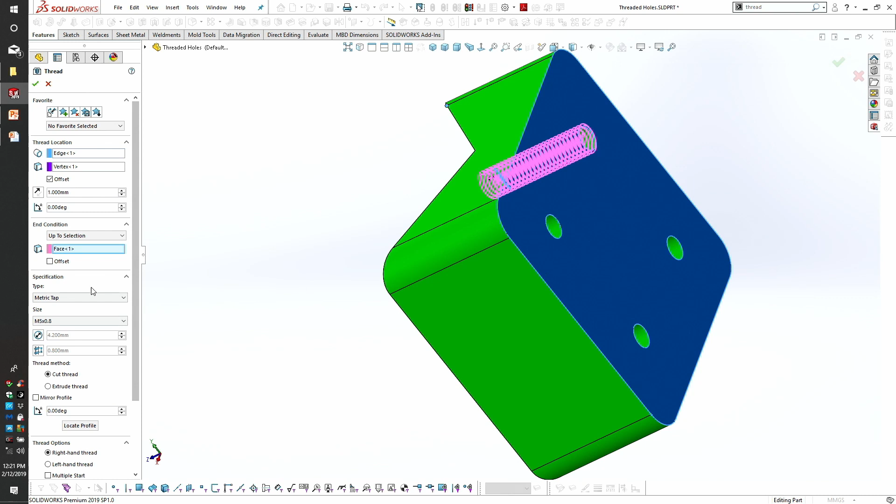And I can do an offset here as well. So if I look at the top here, now my threads are above because I did an offset before the threads, and then I'm doing an offset past the threads. This way, I get a nice continual thread all the way through the part. Click on the green check, and there's your threads. Now you could add a chamfer if you want, but you'd have to pick the chamfer edge instead. I'm doing this for 3D printing, so it doesn't have to be too pretty.

You can do a pattern with this. You don't want to do a mirror with this. Why? Let me hear it. Why? Because you make what kind of threads? Left-handed threads. Don't do that.

I might have, I might not have, I don't know. What's that? That would be appropriate. Yeah, what I did wasn't appropriate. Might have done. Might have.

Undersize the threads for your PLA extrusion? Yeah, so that's a good question. So what I do is I chase the thread. I make it right to the minor diameter size, and then I chase it either with the screw or with a little tap. Doesn't matter. It's plastic material, right? So that stuff will clean out nice.

I brought it to a client one time. They're like, "Where's the inserts?" I go, "I don't use inserts." They were like, "Oh, impressive." So give it a try. I know different materials have different strengths, but I was pretty impressed with the material that Markforged produces.

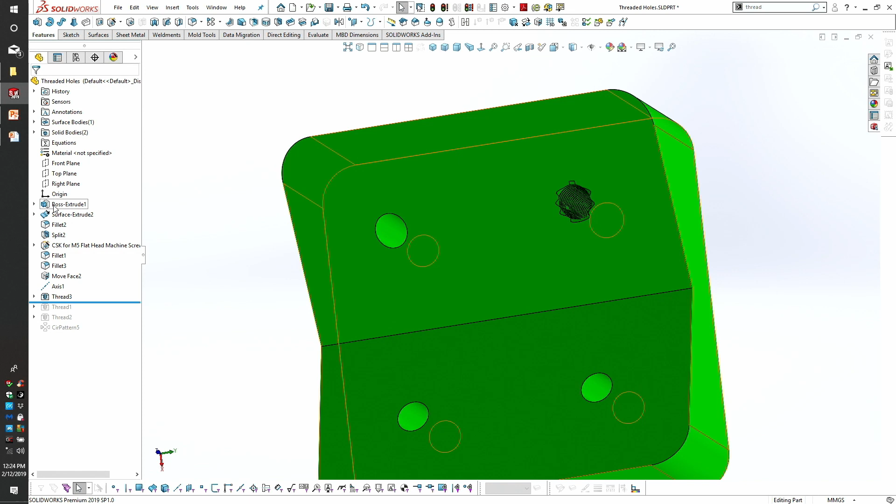Here, this is kind of a pet peeve of mine. This is one that's very simple that I'm sure all of you know about, but very few people use. I fight my students on this nonstop, and I go out in industry and work with companies that contract me, and I still see the designers using their FeatureManager design tree the same way, and they do the rollback and everything.

Everybody wants to go to the bottom and grab that rollback bar and drag it up to the location they want to roll it back to. I do it myself, but there are so many shortcuts out there that will make it much easier.

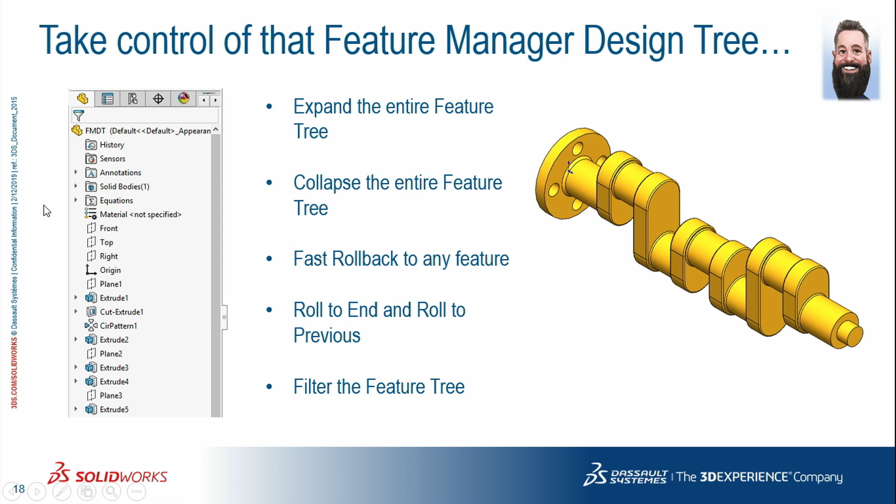For many years, we struggled with grabbing that rollback bar, and now in 2018, Service Pack 5.0, they made that rollback bar a little bit wider, so it is easier to grab. However, instead of scrolling down to the bottom, grabbing that rollback bar, pulling it back to where you want to roll it back to, let's say I want to roll it back to extrude 8, and to include extrude 8, I simply right mouse click and I select rollback and it rolls it back.

I'm going to go up a few more features and do it one more time. I'm going to right mouse click again. I can roll to previous. I can roll to end. So much easier than scrolling down a long feature manager design tree, grabbing that rollback bar, and then holding down that left mouse button, hope you don't release it as you drag it up the tree.

Something else you can do with this is going to the very top. I'm not sure if you know this, but you can filter your tree. So I can type the word plane here, and it shows me all of the planes in the feature manager tree. Now, one thing I mentioned earlier is I do require all of my student assignments to be fully defined. And for years, every time I'd open up each one of their assignments, I want to check the sketches. I'm clicking, I'm clicking all day long.

So quite a few years back, I started to research through the help screens and the forums, how do you fully expand your tree? Does anybody know? Control T? Yes, Control T. You know what's interesting? The discussion forums, it was all over the place. Nobody knew. And they're throwing out all different ideas. So one way to expand the tree, you can click on, in this example, the part name, hit the asterisk, and it expands the tree. So you can see the entire tree expanded.

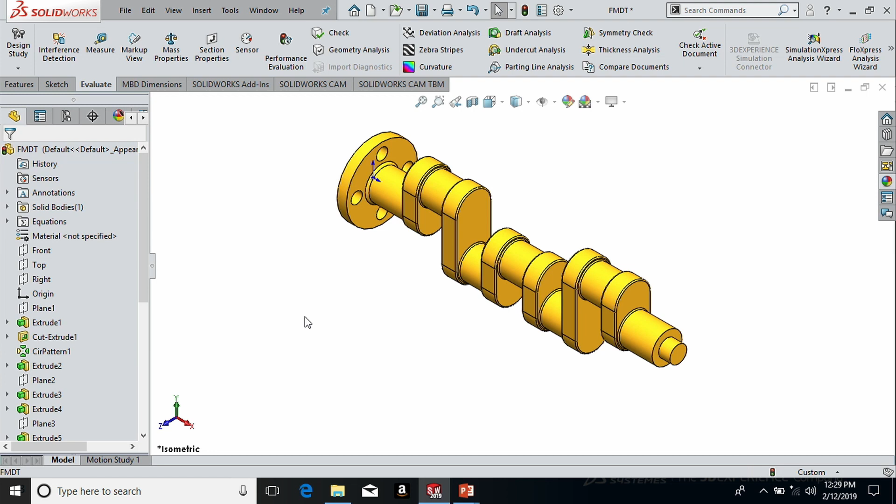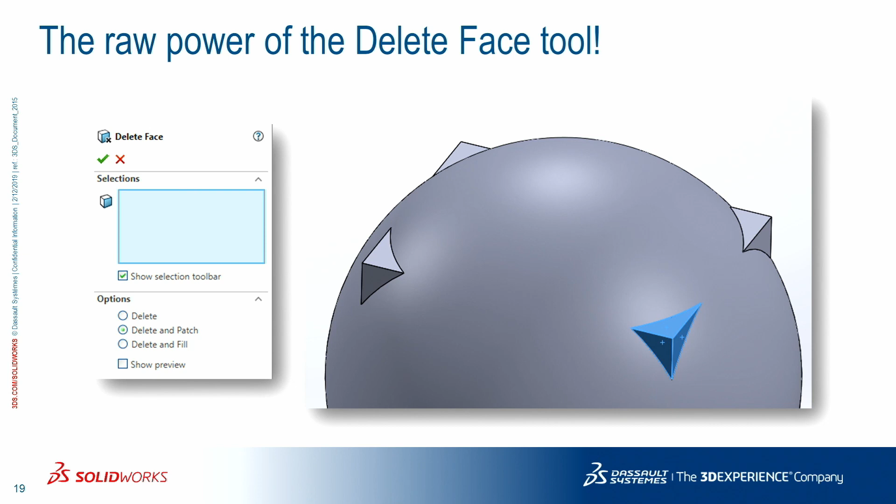Okay, I have here an obtuse model just to show you this part of the presentation. Delete face tool. Who uses the delete face tool? Ah, yes, you guys are my friends. Who loves the delete face tool? Yeah, what's that? Favorite command. If you talk to people at SOLIDWORKS though, they hate it because of the code that goes into it when you use it. It's like this long in a part file. Open that up.

All right, so picture this as a part file, doing some geometry, maybe something inside, and all of a sudden the corners blow out. That's what I'm trying to really depict here. There's a caveat to delete face. You have to be able to pick all the faces. So whether you're clicking them or using a filter tool, that's the key. If you don't get all those faces up to the edge, it does not work.

If I know how to type, I'll get to delete face. There we go. So delete face, it's a feature. I'm going to just click on this, this, and this. I could click on this, this, and that. I could click all four, doesn't matter.

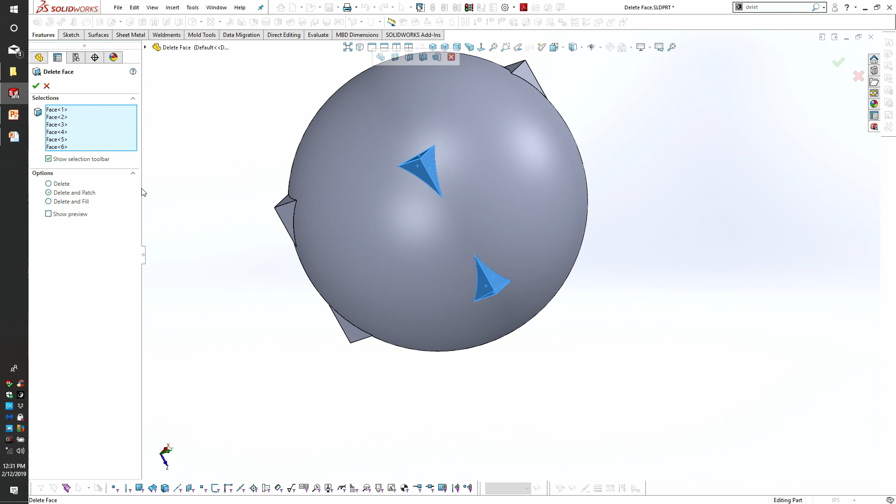I have delete and fill, which will actually remove the geometry and then put a patch. I have delete, which just blasts a hole right through it, and then your part is a surface. That isn't good for anything. And then delete and patch, which is what I want. I basically want to remove that corner, get the spackle out, and buff it nice, right?

That's it. So if you have geometry that's extending over a surface or a feature, and you just want to remove that geometry, boss says, hey, I need that in like 5 minutes, you're going to use the delete face tool. Trust me on that one. Who's going to start using that didn't know about the delete face tool? Yeah, okay, good.

What's that? Move face is great too, yeah. So we have move face as a command up here. Same sort of operation. Offset, you can translate, you can also rotate. So these are direct editing commands. These are nice commands. They're very friendly if you use them the right way. So again, dive deep into some of these features. They could really help you in a pinch.

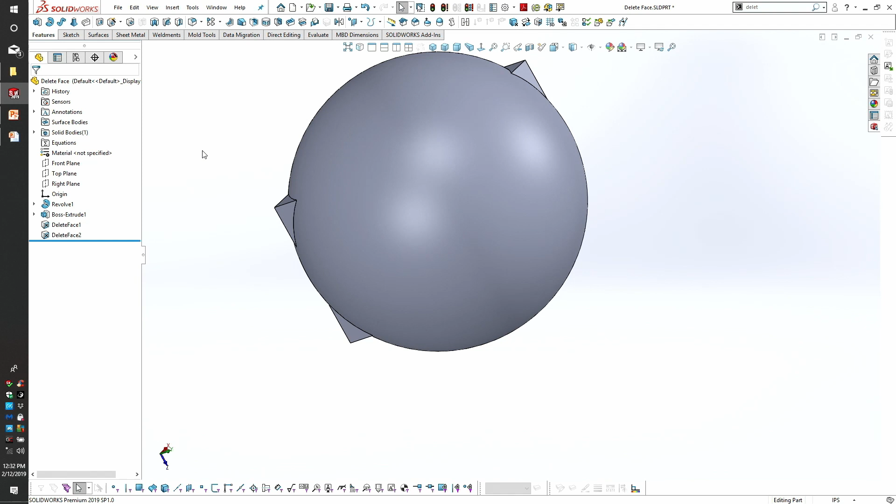What's the difference between patch and fill? Why don't I show you? So delete and fill. Leaves that. It doesn't knit it, it's like it removed it and then just put in what it means, a patch. And then if I do delete, now it's a hole right straight through, and if you look up here, it's a surface body now.

There is actually an underlying geometry problem that happens, the difference between the patch and the fill. Yes. So the patch, you'll end up with a degenerate point, at the corners there, right. Fill, what it does is it actually lays a square blanket over it. That's why if you have a problem file and you send it to SOLIDWORKS, the code for that is like a mile long, and it takes them forever to figure out what's wrong with the part file.

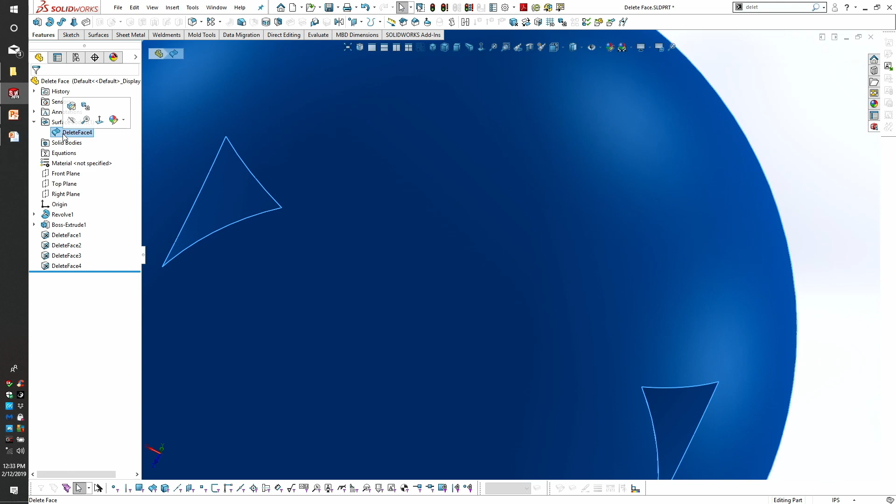Yeah. Yep. That we want to see? So the corners I removed are over here. So nice and continuous. Cool.

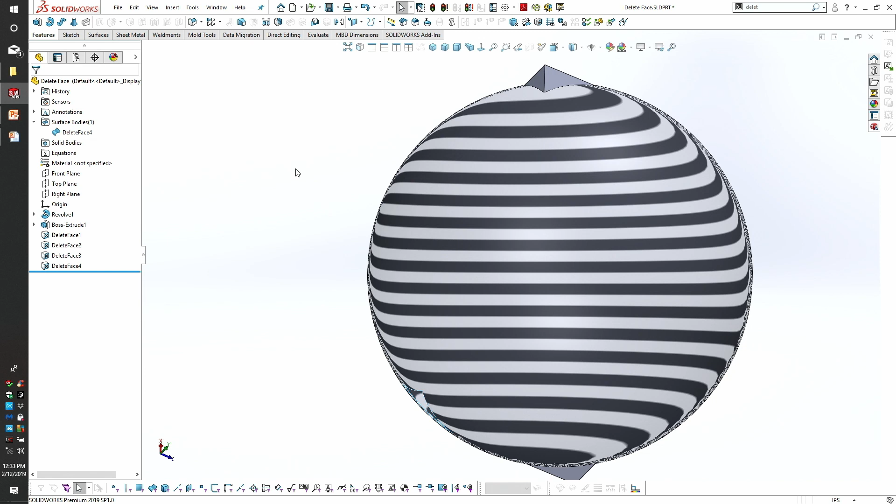This next one here is, once again, one of those options that a lot of people look right past because they use the fillet command the same way over and over. How many people use the selection toolbar that's up here in the PowerPoint? So about a quarter of you. A lot of times, we're used to using commands the same way over and over, and something new pops up on the screen, we never see it. I believe this is one of them, so I'm going to take you into a model and show you some of the benefits.

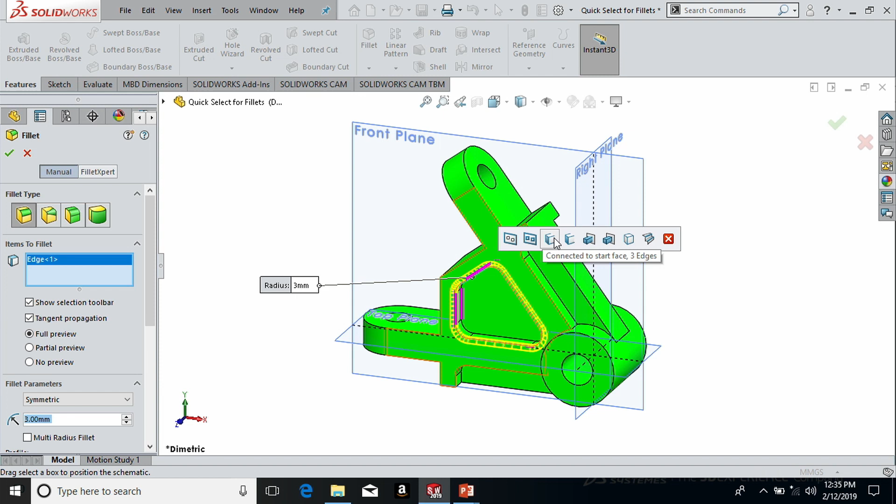I'm going to go to the fillet command, select fillet. Let me change that fillet size really quick. And you want to make sure your show selection toolbar is checked. So I select this edge here. Notice the selection toolbar pops up. This is just a quick, easy way to apply multiple fillets across your model with a single mouse click.

If you haven't used this before, I'm not sure when they added this selection toolbar. Does anybody know? 17? I've been looking right past it myself. I'd never seen it until just recently. So again, I'm just as guilty as everybody else. I create my models the same way over and over.

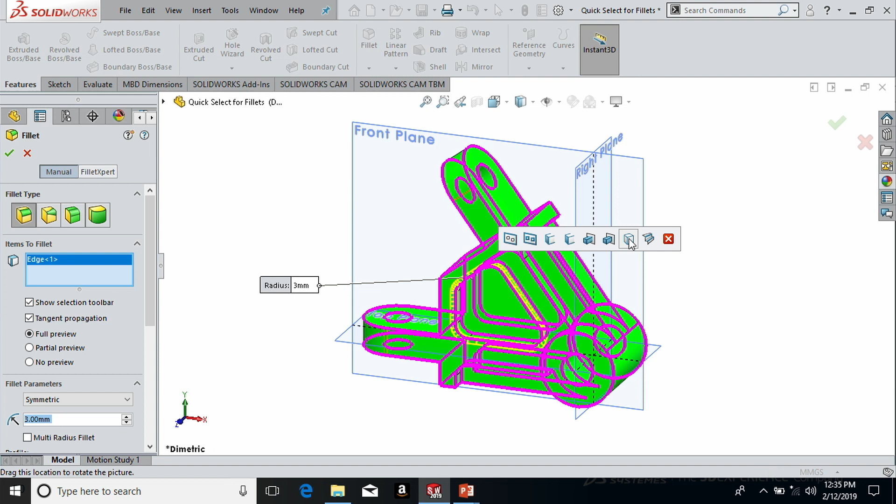So again, you can select, apply the fillet, and notice quite a few mouse clicks it saved. And then process it. Oops, got a little bit of a problem with that though. So obviously I have to run the FilletXpert. Any questions? Yes. Chamfers. Yeah, chamfers and radial edges. And this is for both constant and variable fillets.

So this here is another obtuse example. I'm going to show you how to create a lock concentric rotation of all of those in one click. Now, granted, I could do one and pattern it, but the purpose of this is to show you where that right-click feature is to create something quicker and easier than you would expect.

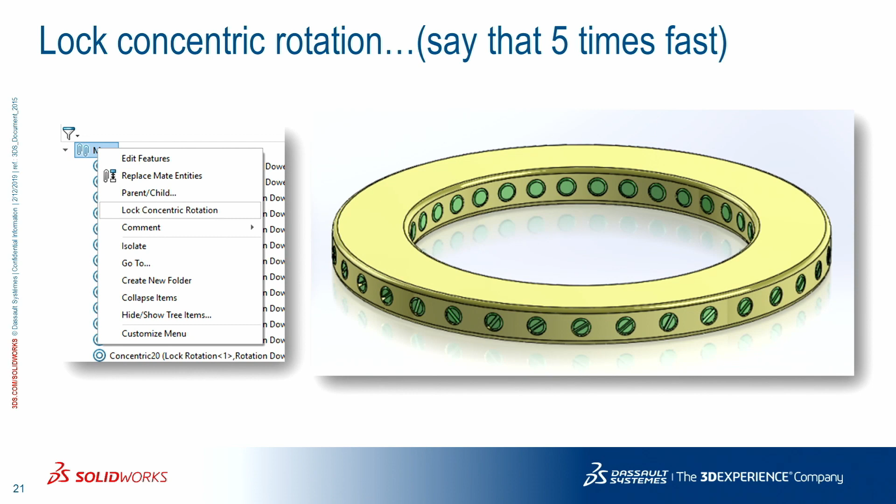All right, so I have a ring. I have a lot of these set screws in the holes, and they're all undefined. I mean, they're concentric to the hole, but they're not lined up vertically or horizontally. I worked for a German endoscope company for about 5 years, and everything had to be fully defined. Sketches, assembly, parts, files, it didn't matter. Even if it was a dumb file, I couldn't have a minus sign next to it. Everything had to be locked down.

So the real slick way to do this without spending hours of time, front face, parallel, lock, line, all that good stuff, is if you go to your mate tool, you see all those concentric mates, correct? If I right-click on one, I have lock rotation, and it highlights the circle with a filled dot in the center. So that's locked, okay? If I want to undo that concentric rotation, I unlock it, right-click, same thing.

If I click on mates, lock concentric rotation, concentric, thank you. I think I just got yelled at. Hold on a second.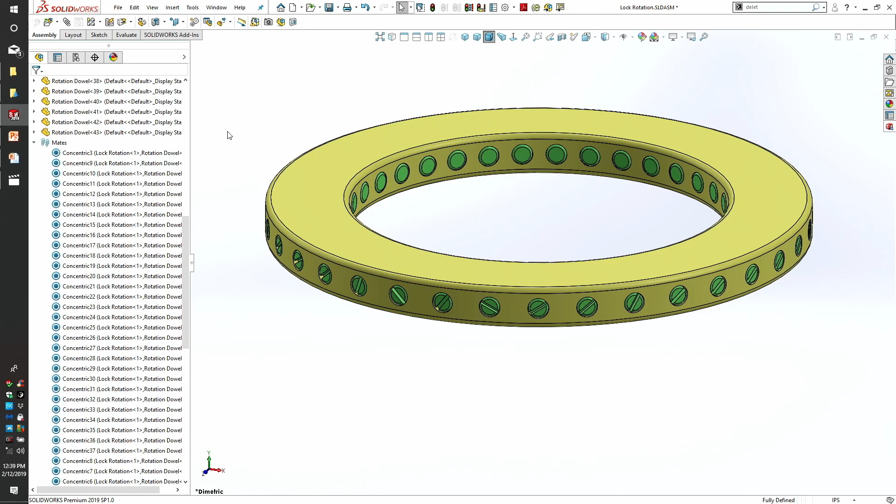So this next one here, Control Q, friend or foe. I view it as a friend. But one quick thing here is how many times have you been modeling a part, you complete the part, no red or yellow over in the feature manager tree, no apparent errors. You send it off to a colleague or a customer, they open it up, and they're seeing red and yellow on the left-hand side of the screen.

They call you up, message you, hey, I'm seeing mistakes. What's going on here? And you're thinking to yourself, it's fine for me. What'd you do? A lot of times it can be in what I'm looking at here. Did I do a verification on rebuild? How many people know what VOR is? Just a few of you. Okay, interesting. Well, first of all, when you see the green light icon, that's your standard rebuild, correct?

So if we place a fillet on the edge of a part, and you do the standard rebuild, or you can do a Control B instead of hitting the icon, all it does is make sure that fillet fits within those two adjacent faces. That's it. It's not checking against any other geometry in the model. And I'll show an example here in a second.

The Control Q, that's a force rebuild. That will rebuild the entire model from start to finish on the feature manager tree. But again, it still may not find geometry. If I place a fillet in there too large and it's giving me undesired results, it still may not throw an error message. So I'm going to open up a part and describe what I'm talking about.

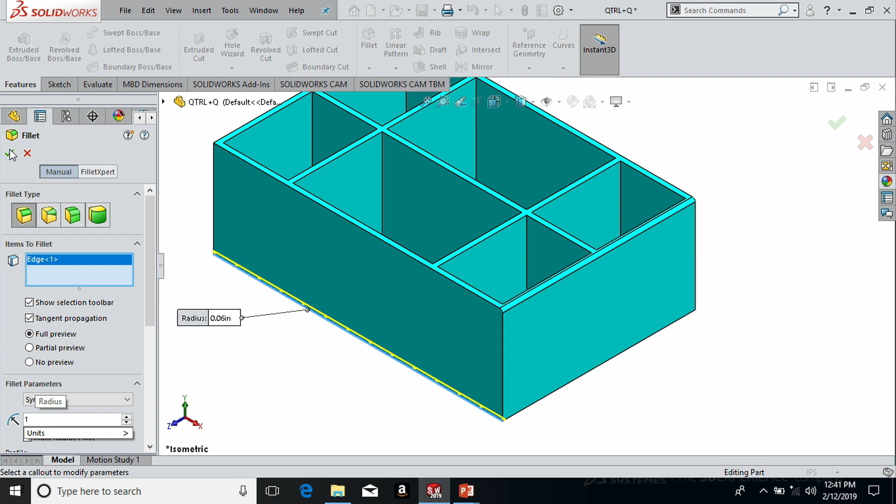Now I'm going to come down here and place a larger fillet. Let's go with a 1-inch fillet. Notice that was not my intended result. And again, if I do a rebuild, if I do a Control Q for a forced rebuild, no error messages. What you want to do is look at verification on rebuild, the VOR.

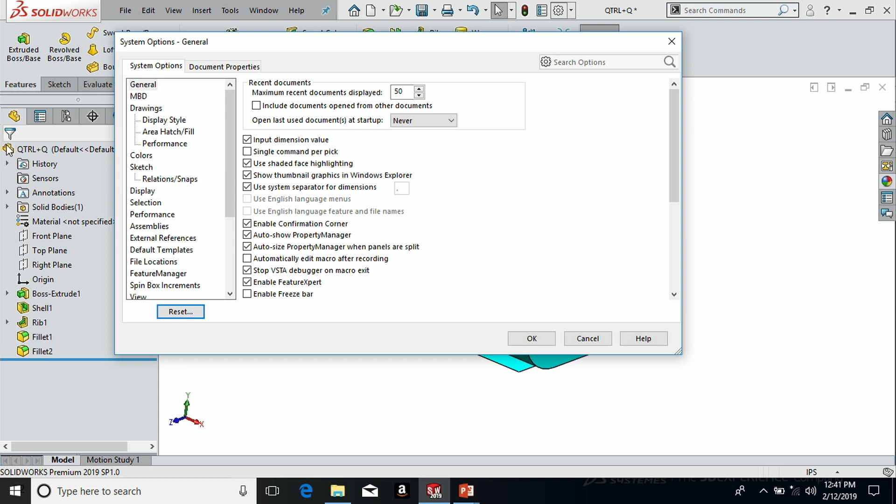So I'm going to go up to my options, system options, performance, and turn on verification on rebuild. What this does, it checks that new feature against every changed or modified feature, not just the adjacent ones. So once I turn on the VOR, I click OK, and I do a Control Q, now it's going to throw an error message. And there is some performance concern here. If you have a very complex part, this will affect the performance of your software.

But here's a good practice you may want to consider. Turn off VOR, and when you finish up that model and you have that model completed, turn VOR on for a second and do Control Q. So Control Q with VOR is pretty much making sure that all of your geometry fits and you won't have any issues like this. I do it at the very end of every model, and then I turn the VOR off as I'm modeling the rest of the part if the part's going to be complex. Otherwise, I simply leave it on.

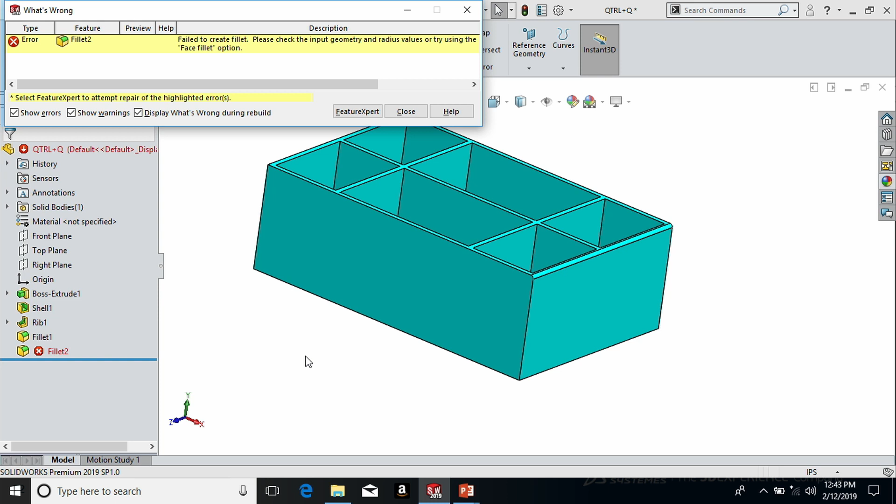I'm sorry, say it again? And yeah, exactly. Right. The shell won't know what to do. Yep. So we can reorder the features and correct it, just another way of approaching the problem.

Any other questions? So again, I've had a number of models I sent out to my customers, and they look perfect. Put a lot of hours into them, only to realize the customer receives them and they're getting error messages. So I now make it a common practice to do the VOR plus the Control Q before I send out a model.

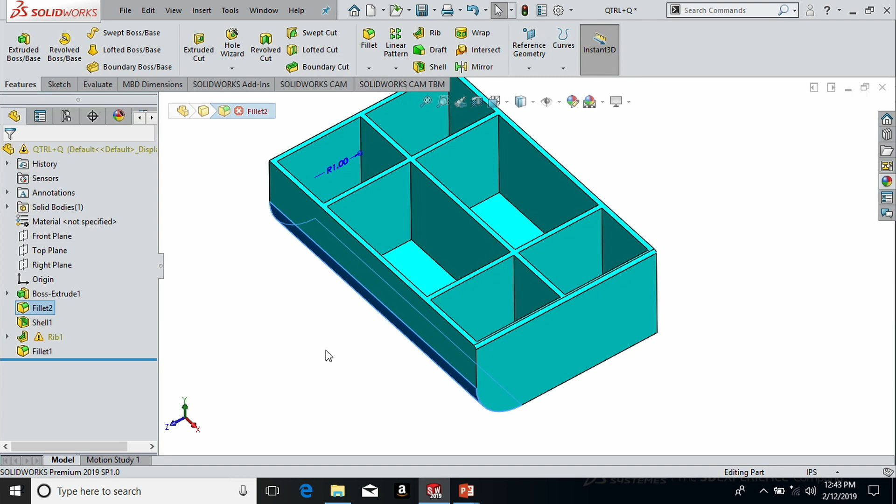One more tip from me, one more from you, and then the video, good, because I think that's what we've got for time. I'll let you set up the video too.

Am I going to get yelled at again because I can't pronounce what the word is? Just kidding. Drawings? I picked up on that, Ed. Love my Boston accent. That was cute. Park the car in Harvard Yard. There you go.

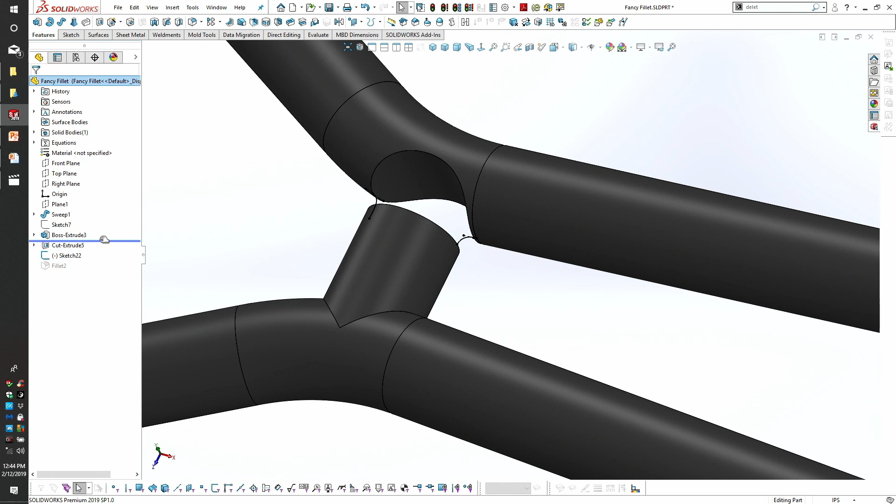All right. So I have this already in here, but let me delete it. Delete that. Roll back a little bit. A little bit more. Yeah, yes I can. Is that hard to see? Yeah. Good call. There. How's that?

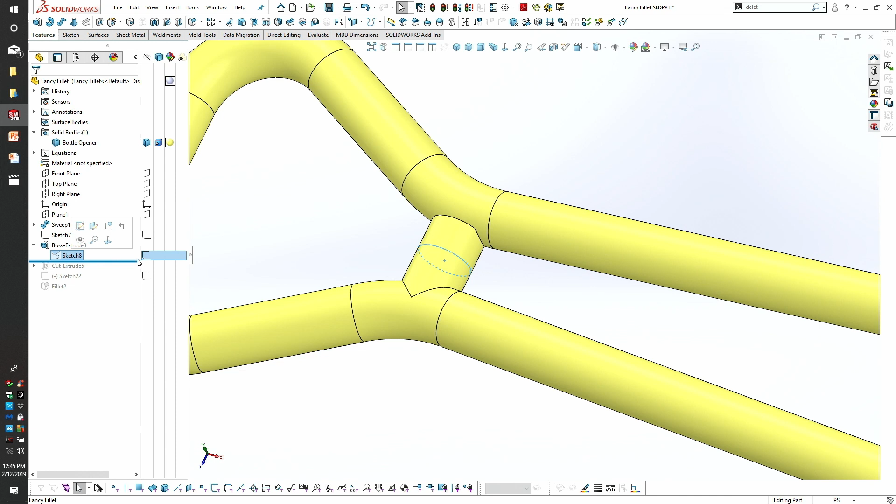So I just did an extrude into that body. Nothing fancy there. I created a fillet on that edge you saw prior. Just click that edge, do a fillet. Pretty straightforward. Don't like the looks of that. So what I'm going to do is a subtractive process. So my sketch is just basically a semicircle. I'm just blasting right through, removing material.

Here's my sketches. They're just two splines. They're in the same sketch. I do a pierce point to that edge, pierce point to that edge, pierce point to that edge, pierce point to that edge, just creating a spline. I don't change the control arms. I keep it tangent to the surface, straightforward. I don't need any extra push and pull on those splines. Let the geometry fall where it may.

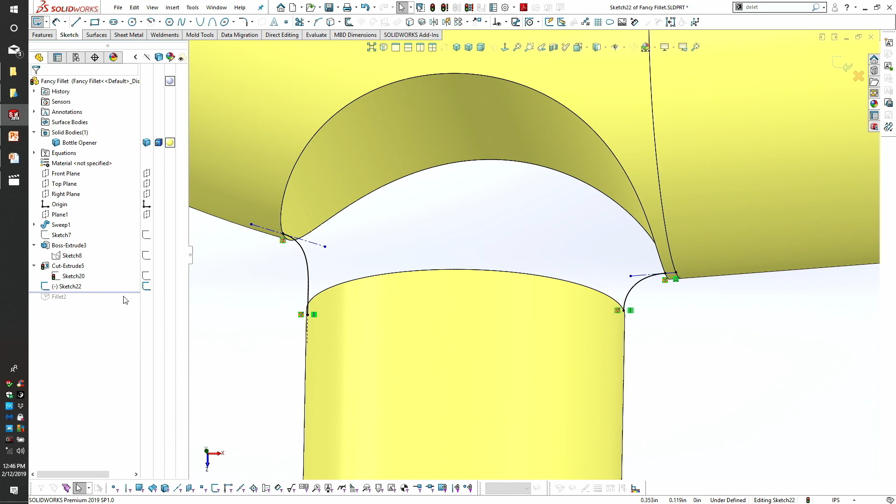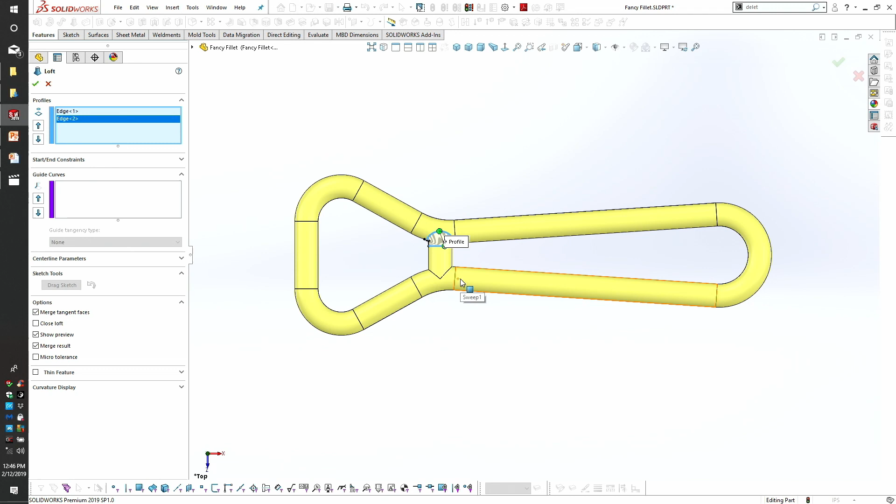Then I use the loft tool. I'm just picking that edge. I don't need a sketch. Picking this edge. I'm already getting definition. That's good. I'm in the right spot. But if I look from the top, I don't like how that flows into the center section, that little bar in the center. So back to my guide curve. Click that guide curve.

Selection manager, I need to do a select open loop. That. I forgot to pin my selection manager. Click that one, right click. So I'm getting that nice flow now. That looks a little bit pretty, sexy, aesthetic. There we go. Green check.

And done. So don't think when you do modeling, it has to be all additive. You can do subtractive modeling too. You can always remove stuff to rebuild something that looks nicer. Cool?

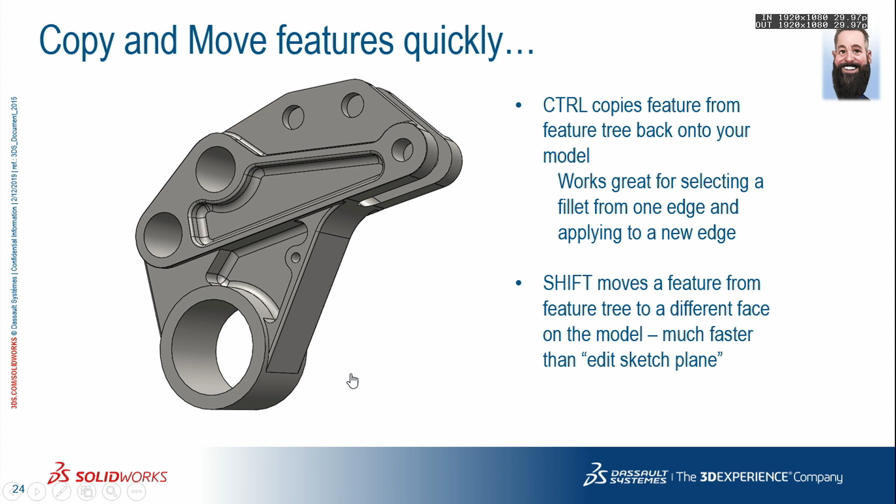This next one here, I'll be honest, I don't use this one, but every time I show it to people, they think, well, that is cool. So that's why I threw it in here, just to show you how we can quickly copy and move features from one edge or surface to another.

So notice I have a fillet down here in the bottom of this pocket, and I want the fillet at the top edge. Now before I show you how to quickly place that fillet on the top edge, I do want to scroll down my Feature Manager design tree and show you I have currently 8 fillets. So this fillet here, I'm going to select it, and that happens to be fillet number 3.

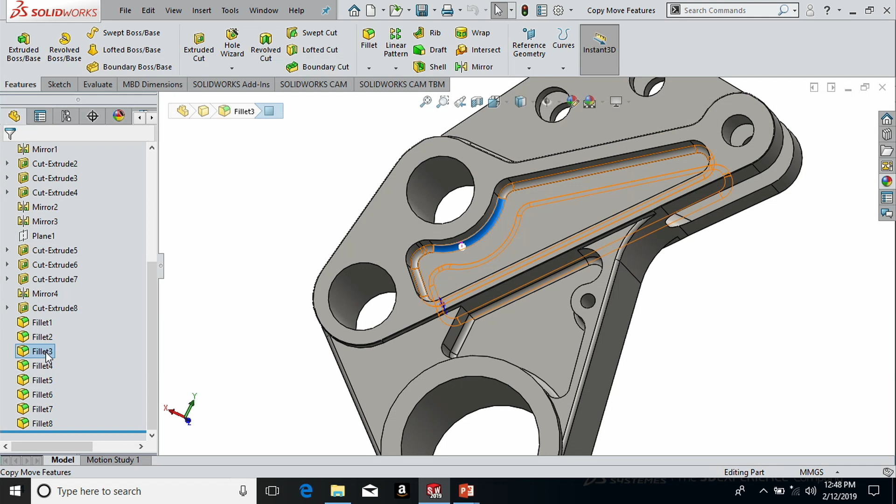I'm going to hold down the Control key, hold down the left mouse button, drag that fillet over to the upper edge, release it, and it applies the fillet. So how many people knew you could do that? Wow. Okay, cool. Now, yes, it actually created another fillet. Creates a new feature. Yeah. Yep, so we have a fillet 9 now. What's that? There, it's a whole new feature. Correct. Separate. Yeah, it's not sharing that feature from above.

Now let's say, for example, I want to move this cut extrude feature to this face over here for some reason. Well, one way to do it is to expand that feature, right mouse click in the sketch and edit the sketch plane, correct? And select this face over here. Well, I can actually hold down the Shift key, hold down the left mouse button on the cut extrude feature, and, okay, let's get it to work here.

I'm going to pull it over that surface. Okay, let's try it one more time. Yeah. Yep, I think you're correct. No. Okay, one more time, then we'll go to the video. We did earlier say we fumbled with a few of them. Yeah, hold down the Shift key, grab the feature, and it should move it to that face. And again, the caveat is you have to pull them from your Feature Manager tree. I could not pull this fillet from here up to here. You got to go to your Feature Manager tree to copy and to move.

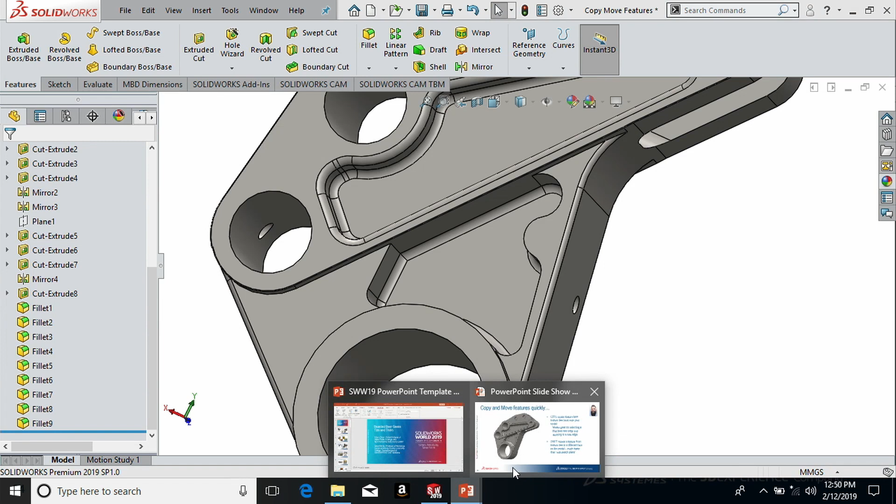So this video here is just something that Ed and I thought was funny. We've all been in these meetings like this before. You may have seen this video before, but it's always worth watching a second time if you've seen it before.